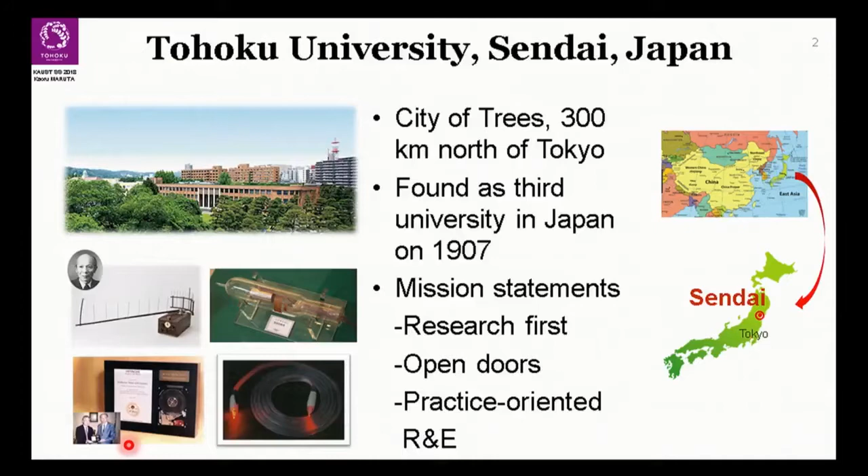And myself, I say that it has been 25 years since I started my career as a combustion researcher. In the 90s, mainly I was dedicated to combustion under microgravity. Actually, 3M: microgravity combustion, mild combustion, and microcombustion. So I'm always saying 3M - microgravity, mild, and microcombustion.

Let me make acknowledgements to my collaborators, particularly three people. Takashi Niioka, Professor Takashi Niioka, a former boss, he is already retired. He has been at UC San Diego, working together with Professor Williams, and of course he has a lot of theoretical papers, which I don't. And also I met Professor Yiguang Ju.

Now he's working in Princeton. Actually, he got his PhD in Tohoku. When he was a student in Tohoku, I was sort of a postdoc, called a Research Associate, and we worked together. It was a really exciting period, and still sometimes we meet and talk about miscellaneous things. And one more, a guy from Russia, Professor Sergey Minaev. Now he's in the Far East.

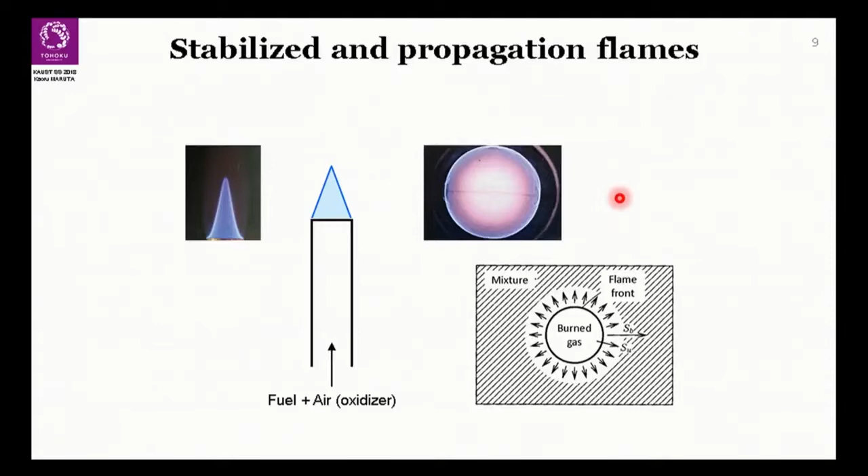This morning I talked with a young guy who's working on engines. Sometimes combustion theory doesn't work because maybe the engine is too complex, but it's still under the principle of basic combustion theory.

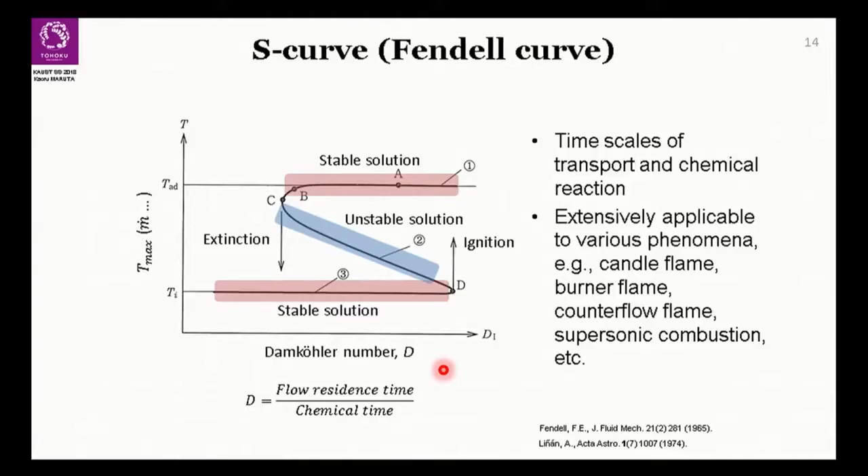You light it, and it's stable combustion. What's happening here? Of course some complicated phenomena are ongoing on the candle, but chemical reaction occurs in a certain finite time, not infinitely fast. But overall, the flow residence time allows the chemical reaction to stay there. So how do you extinguish the candle flame?

Yes, this makes the flow residence time shorter than the chemical time. That's why the flame blows out. This is a very, very simple concept, but it's applicable to burner flames, counterflow flames - I think even supersonic combustion overall.

So if your flame is unstable, you either increase the chemical reaction speed or increase the flow residence time. Then the phenomena moves to the right side of the figure, and this is the stable solution which corresponds to flame. If you decrease the reaction speed somehow, the Damkohler number becomes smaller and smaller, and finally the flame extinguishes to this point, which is like ambient temperature - reaction stops.

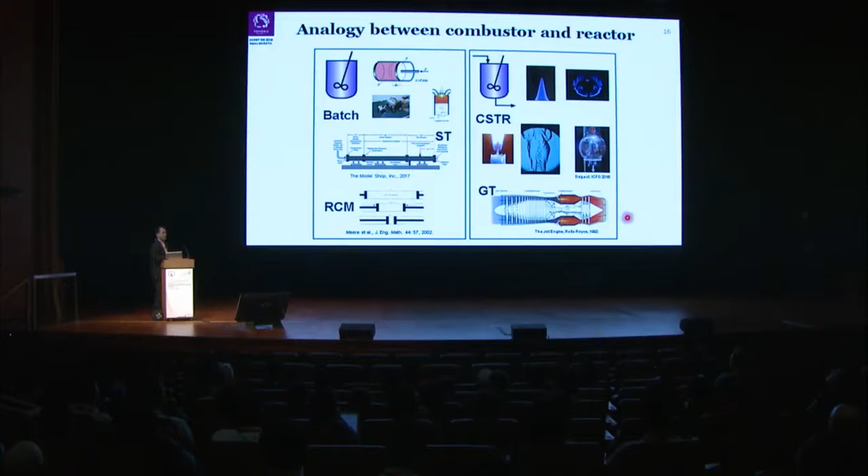Combustion problems are really widely multi-scale. Chemical time is like 10 to the minus 2 or even longer, for example NO formation. This morning Professor Dibble mentioned that the NO reaction is very long. So how to manage the NOx stuff—in the 1960s and 70s it was the biggest issue in the world, to avoid air pollution.

So what the combustion device does is use this difference in time scale. NO formation is very slow. In equilibrium conditions, NO forms in a certain amount, but since the reaction speed is very low, chemical time is very long. So after extracting the energy from combustion, which is usually very fast chemical reactions, you just stop the formation of NOx. That's the main strategy that modern combustion devices use.

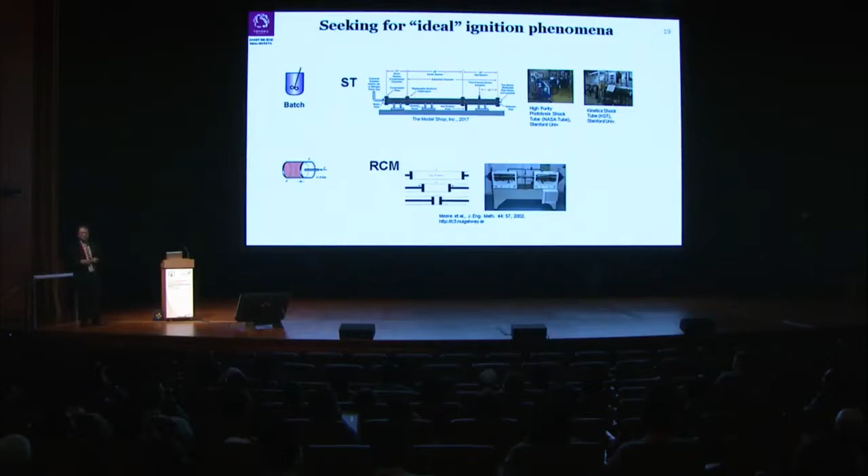Okay, again, please imagine that all the chemical kinetics are unknown. You need to have standard phenomena to construct reliable chemistry kinetics. So for that, mostly on ignition phenomena, I think the representative method is the shock tube.

I believe—have the students looked at the shock tube here already, or not yet? Already, yes, and some of you are working on that maybe. And also rapid compression machines—I think this is the same style as what you have here, right?

This is the style of the twin piston setup from Ireland, Galway, Professor Henry Curran's group. Very reliable data is obtained. So then, if you have standard experimental data combined with some theoretical work, you get reliable chemistry.

Also for ideal flames—what is an ideal flame? It's obviously probably one-dimensional, also adiabatic, also without any external effects, which means the area is infinitely large, a perfect plane, propagating in only one direction as a plane.

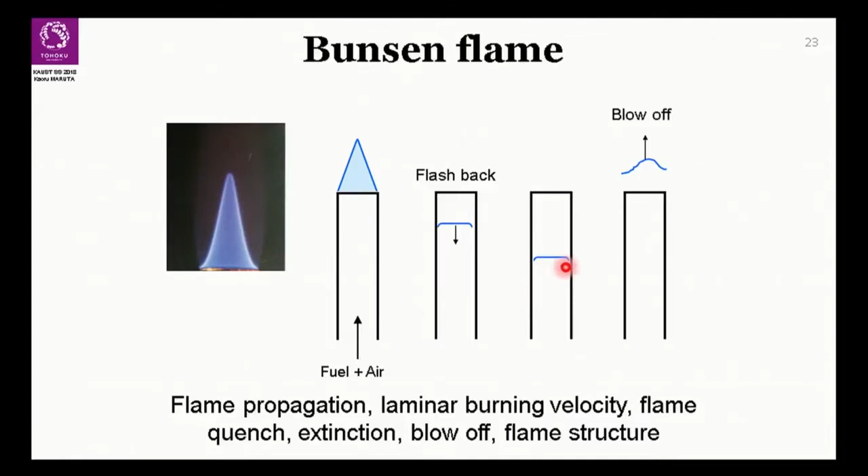And then this flame is stationary, but relative to the mixture, the flame is propagating into the mixture. On the contrary, if you increase the speed, this is blow off. So from the Bunsen flame, we have several very basic flame characteristics: laminar burning velocity, flame quench, extinction, blow off, and flame structure.

I believe most of you are already familiar with the chemical modeling stuff. For premixed flames, the mathematical treatment sometimes starts from the Rankine-Hugoniot relations, because there are two modes: one faster than the sound speed, and one much smaller than the sound speed—one detonation and the other deflagration.

So the flame is actually deflagration, and several levels of mathematical treatment are possible. Actually, I borrowed these figures from combustion physics. In the simplest model, the flame is treated as just a discontinuous interface between unburned and burned gas, and both sides are in thermodynamic equilibrium. This concept is very often used when the structure of the flame is not important.

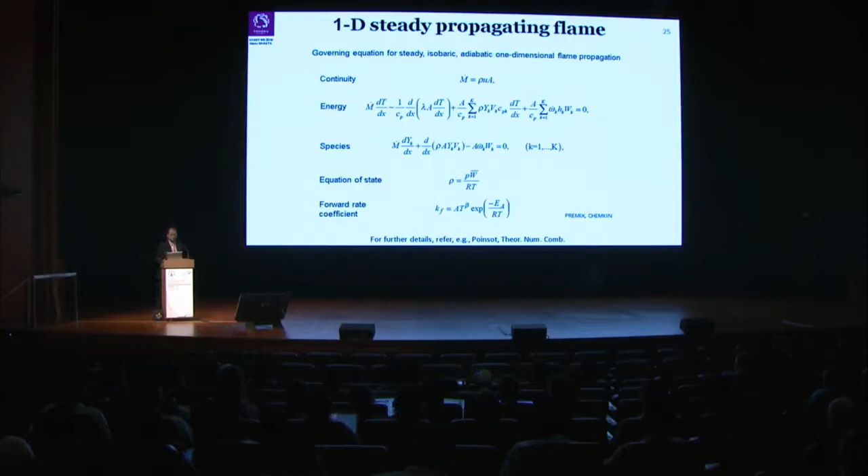Starting from methane: in the first, simplest model, reactants just turn into products, so you only consider methane and CO2. But if you need to consider the intermediates and the process of the reaction, you need to include more species.

Zeldovich presented just a two-step model. Before the computational period, the overall one-step reaction program was used, and is still used. But once you need to consider the behavior of intermediates—radicals or heavier molecules—then you need to have another intermediate species. This also predicts something very useful.

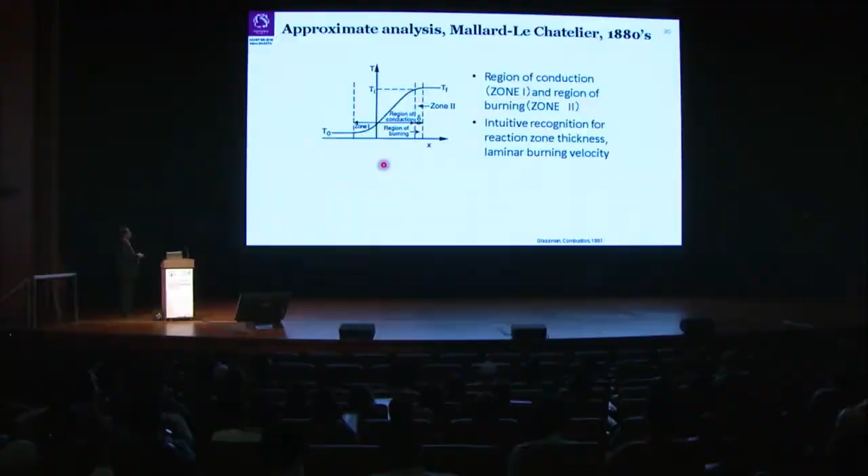You equate the flow going into the reaction zone with the reaction rate, and then you get the laminar burning velocity dependence. From this, you can readily obtain the relation between flame thickness, laminar burning velocity, and thermal conductivity. This gives an easier, more intuitive understanding.

For example, with a methane flame in air, if you replace nitrogen with another inert gas, the flame speed changes drastically. If you replace nitrogen with argon, the flame speed increases; with helium, even more. How do you explain this? If you have Chemkin, of course you can compute it and get the right answer, but why?

So here, for example, the argon flame is faster in laminar burning velocity. Why? Because argon is a monatomic gas, so its specific heat is lower than nitrogen's. Heat release is the same because fuel amount is the same, so the flame temperature of the argon flame is higher. If you compare argon and helium, both are monatomic gases, so flame temperature should be almost equal—but the thermal diffusivity of helium is much larger, so the laminar burning velocity of the helium case is much larger. It's slightly easier to capture the physics this way.

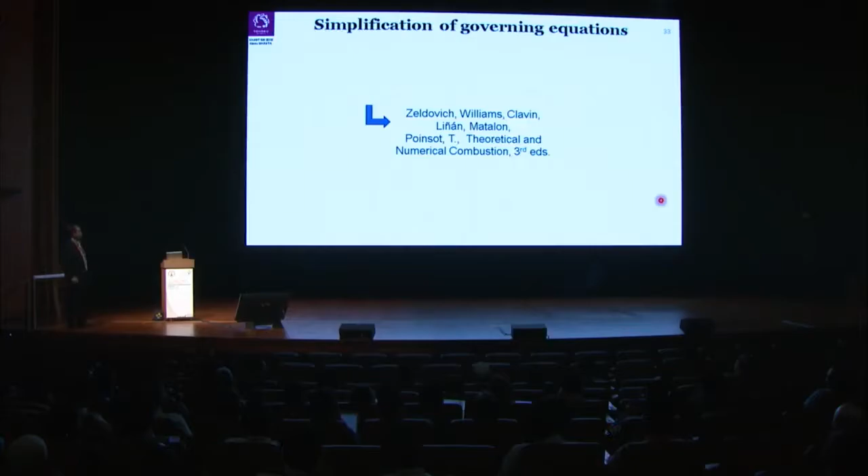Starting from the governing equations in Chemkin, further simplifications were done, leading to a very, very simple model. Such work was done by Zeldovich, Williams, and Clavin before the computational period—particularly Zeldovich's case, around 1940. For anyone interested in this derivation process, I strongly recommend reading the book by Dr. Thierry Poinsot.

The whole process is described step by step in that book. Actually, I learned that his summer school lecture in Princeton is very, very good, and I borrowed four slides from his lecture. It's a bit different, but this is like a set of equations, the same as in Chemkin and similar tools—then you get the result if you have the code and the computer.

But a simplification is made by assuming you only have two reactants, fuel and oxidizer. If you assume fuel-lean conditions, then the majority of oxygen remains unaffected, so you can ignore the change in oxygen concentration. Then you only need to handle the fuel concentration—just one reaction for the deficient species among the reactants. This gives a very simple equation which can be solved by hand, as Dr. Poinsot said. This is the field of theoretical combustion.

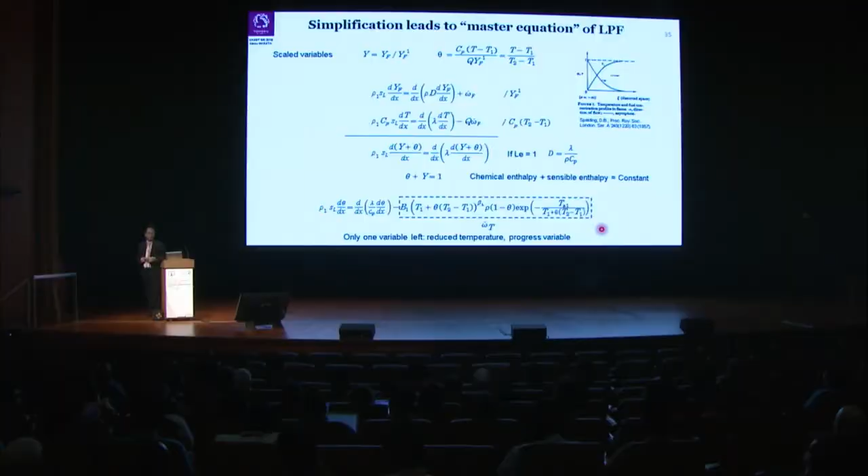Then the two equations can be combined into one if the Lewis number, mass diffusivity and thermal diffusivity, is equal. This theta, non-dimensional temperature, and non-dimensional fuel concentration sum to 1 everywhere, meaning the chemical enthalpy carried by the mixture is turned into thermal energy—chemical energy converted into temperature. Then you have very simple equations: convective term, conduction term, and reaction term, leaving only one variable, which can be regarded as the reaction progress variable. So only one parameter describes the flame property.

Okay, so ideal flame. By the way, what's the time? Oh, it's already one hour.

As I mentioned, ideal flame is hard to realize. Heat loss may always affect the flame, as well as flow non-uniformity and wall effects, either thermal or chemical or both. Because of that, you need to be very careful to prepare an ideal flame, or a flame with a certain known effect, and laminar burning velocity should be measured very carefully considering those external factors.

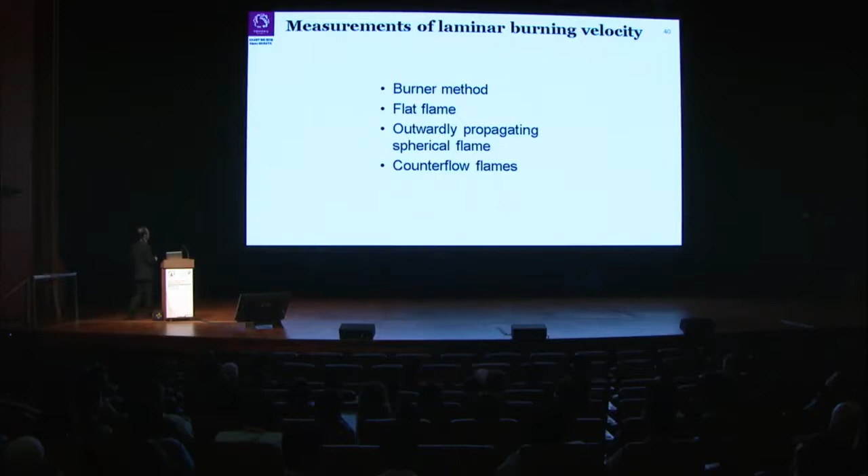Let me briefly go through the very basic methods of measuring laminar burning velocity: burner method, flat flame, propagating flame, and counterflow. This is the burner method—the laminar burning velocity can be measured from the inclined angle of the nozzle flame cone. It is possible, but for high fidelity modeling validation, I think it's difficult to use this method. Then there's the flat flame method, stabilized just above a flat flame burner.

But why is the flame stabilized there? If the flame were free from any heat loss, it could be anywhere, right? The reason it stabilizes just above the burner is because of some heat loss. This is a very modern flat flame burner developed by the Eindhoven group, Professor de Goey's group—a very clever design using a porous plate with temperature measurement by thermocouple.

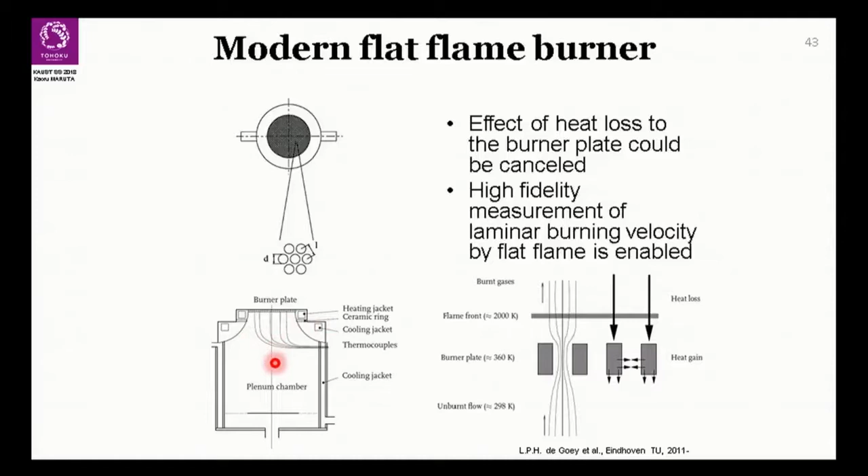If you magnify the porous plate region, the heat balance works like this: heat flows from the flame to the porous plate, heating it up, and this heat in turn heats the incoming mixture. If you measure the temperature time history of the porous media, you can find the point where all heat loss effects cancel out, allowing very precise measurement of laminar burning velocity—a very special technique.

And how about counterflow? Counterflow flame is very commonly used, and a variety of studies have been done with it. This is again one-dimensional. Although the flow is diverging, there's no conductive heat loss because the flame does not touch the burner wall, and the flow can be characterized by a unique parameter, the stretch rate—flame stretch is very important.

So how do you measure the laminar burning velocity with this? This is the actual velocity distribution, magnified, and here is the stagnation plane. Because of thermal expansion, the velocity profile has a minimum, and this point tells you the laminar burning velocity just before the flame.

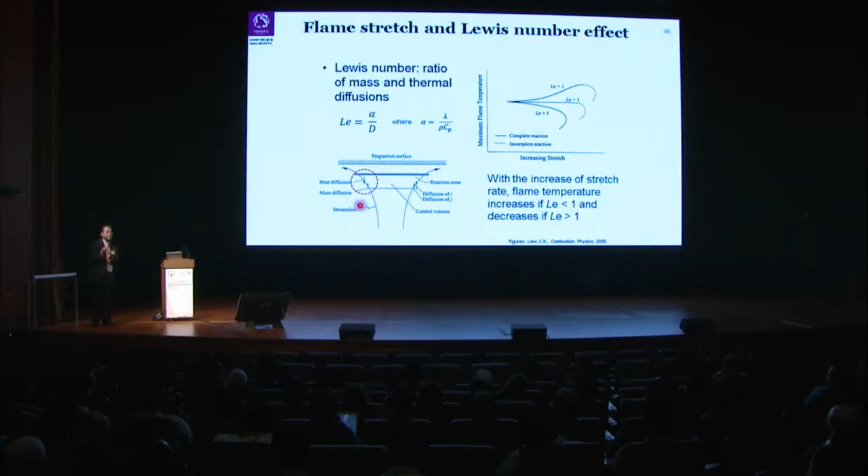Sometimes the flame is intensified, and sometimes the flame is weakened. This affects the behavior significantly, causing very different outcomes, and then from that minimum point, this is under a certain rate of flame stretch.

If you plot this velocity as a function of the stretch rate, you can extrapolate the data, and then you will get the laminar burning velocity, which is free from any stretch effect.

Again, the outwardly propagating spherical flame—this is one of the ideal flames. You take a mixture in a container, ignite it at the center, and then observe the propagation.

At the very initial stage, the laminar burning velocity was measured from the pressure history, together with experimental data and some simple analysis. But this creates very big uncertainties.

Some other factors are also included, again flame stretch, because ideally this assumption seems to work well, but sometimes flame stretch, ignition energy, and other factors affect it significantly. So it's interesting to see the history of measuring laminar burning velocity using this flame.

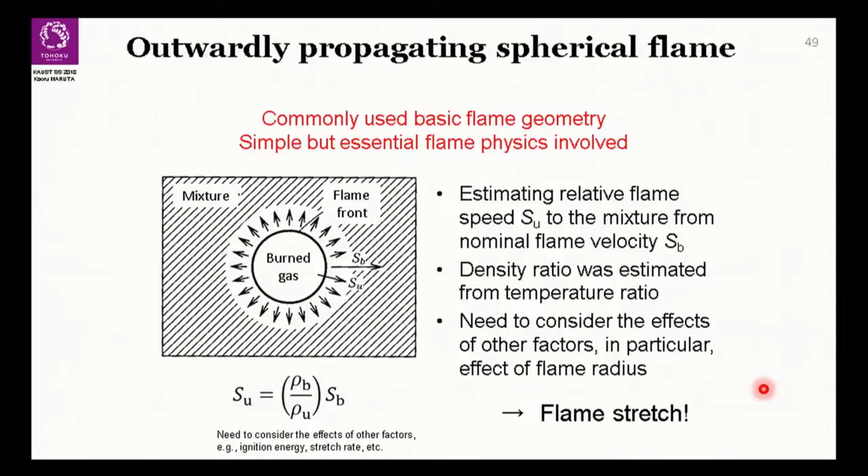Since the concept of flame stretch, studies progressed—I think it's the late 70s to 80s—before the concept of flame stretch, this effect was always hidden in the scattered laminar burning velocity data. That's the reason many results suffered from the flame stretch effect.

Since flame stretch is important, let's confirm the definition. The definition is the change of the flame area, per unit flame area, divided by unit time, and some equation derivation leads to this equation. This equation represents the effect of flow non-uniformity and flame curvature.

You can divide it into this one. This process is also described very nicely in this paper by Professor Chung and Law, and Professor Chung, as you know, is the founding director of the CCRC.

Let's confirm that in stagnation flow, the stretch rate is equal to the velocity gradient here. And for a spherically expanding flame, this term here should be plus. From the change of the radius and the radius itself, you can describe the flame stretch rate.

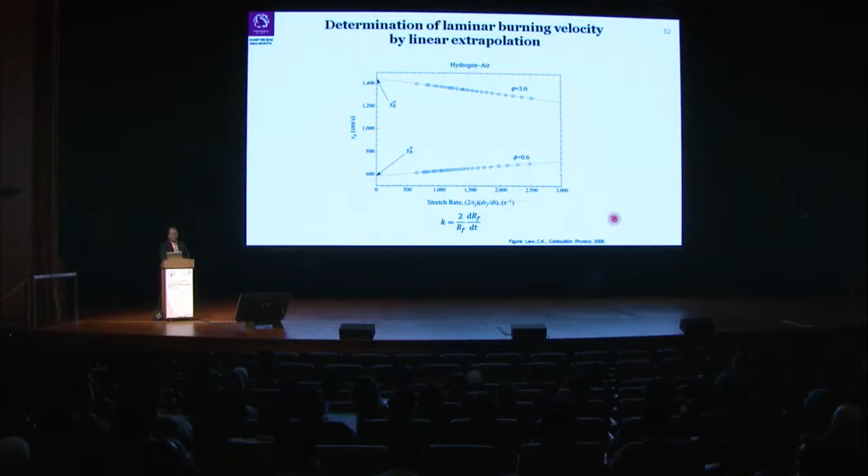This is really basic, but if you consider the Lewis number, it is interesting to see some of the interesting behaviors.

This analysis, I think, is from 2011, but the first papers were in 2007. Some French researchers started analyzing this process, going from ignition to propagation.

Where is the boundary between the ignition phenomena and flame propagation phenomena? It's not so simple, because for example, when building kinetics, you are talking about ignition in a 0D system, which is spatially uniform.

This condition is somehow realized by shock tubes and also by rapid compression machines. But usually ignition starts from one ignition source, starting from a point, and then propagating. After some time, the reaction front can be regarded as a flame.

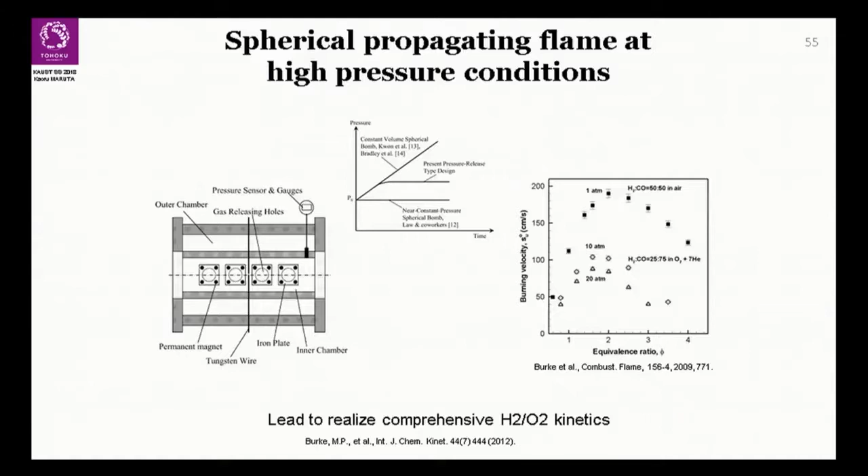After this recognition, very nice data was obtained by the Princeton group - Professor, now he's Professor Mike Burke I think, yes. It's really well-cited data with a long history, but if there's large uncertainty, then maybe there's some hidden physics you can find.

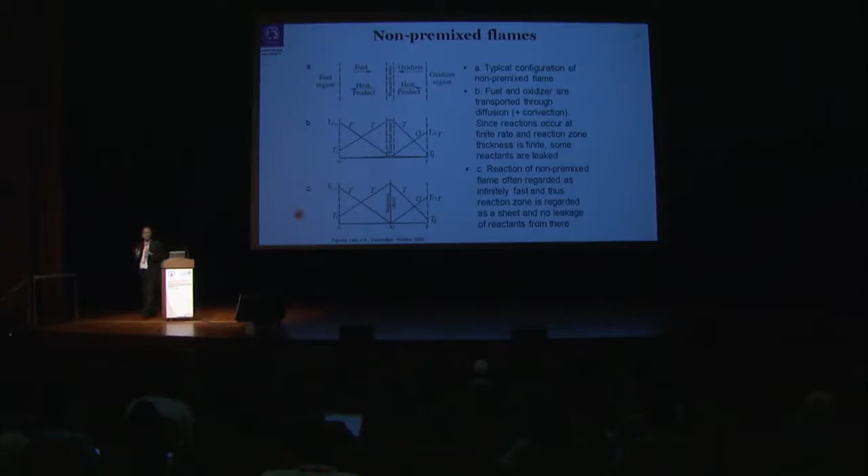It's the counterflow non-premixed flame. This is the very conventional setup - oxidizer from the top and fuel from the bottom. Here it's similar to the conventional counterflow flame, but the flame is formed just in front of the porous cylinder in the stagnation region. The same research is possible here.

This effort was done by the Japanese professor, Professor Tsuji, so this burner is called the Tsuji burner. This is very original, and I think no one has criticized that the data taken with this burner contributed significantly to the establishment of very high fidelity modern flame modeling, like chemical kinetics and so on.

Using the Tsuji burner - I think this work was done in the late 60s to early 70s - they probed temperature, and also used a very thin quartz sampler to measure species concentration profiles. Here's the temperature profile. This is the surface of the Tsuji burner, the cylindrical surface zone, and here's the luminous flame zone - temperature is highest here and then decreasing.

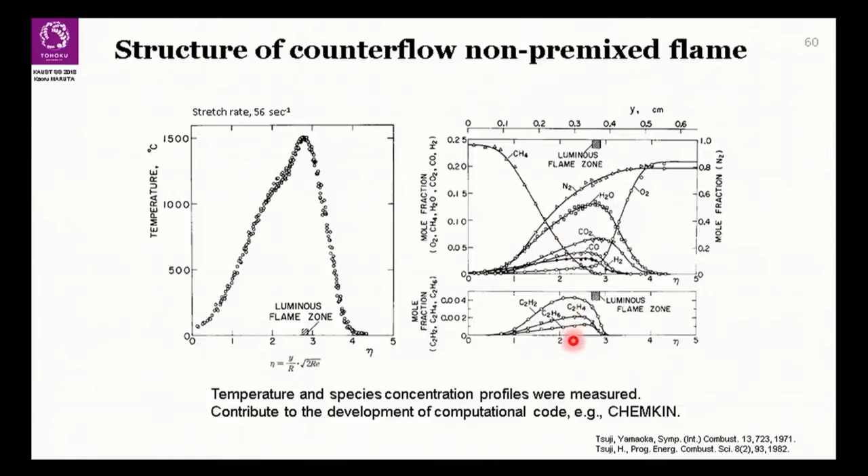Fuel is consumed, some intermediates form, and oxygen diffuses from the bottom and reacts, with some leakage observed, plus products and intermediates here. It's famous among Japanese students that there are no lines in the original data - they made lines connecting the data points themselves. So it's a very reliable experiment.

And for the young researchers, the Combustion Institute announced the Hiroshi Tsuji Early Career Researcher Award. This is sort of the gold medal for young researchers. This award is named after the contribution of Professor Tsuji and the Tsuji burner. So please try to get it.

Bill has a question. How old do you have to be? I think it's younger than 60. No, I'm joking. Actually, it's within 10 years since the PhD degree. So those who are less than 10 years from your PhD, try to get it. I think now there's only one winner, and this year the second winner would be announced.

Okay, regarding droplet combustion. Droplet combustion is the fundamental study of spray combustion. Of course spray is spray, but the simplest component is the single droplet.

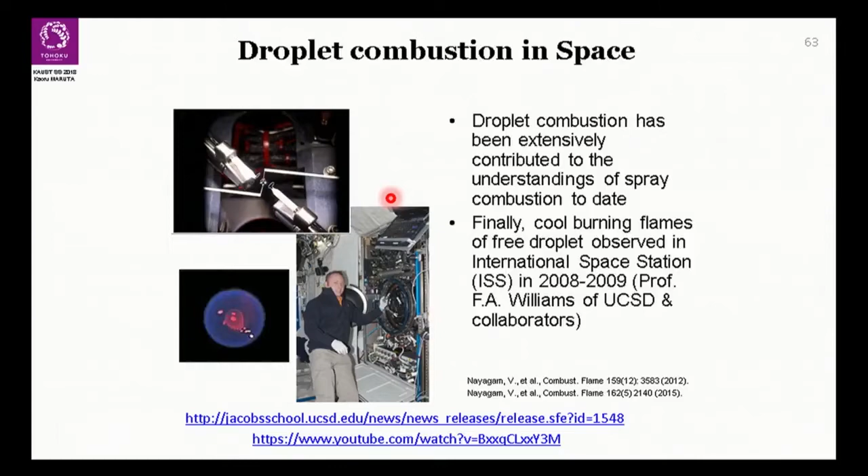This droplet combustion experiment was done on the International Space Station, led by Professor Forman Williams from UC San Diego. Using this setup, a free droplet is formed in microgravity under very ideal conditions - no buoyant flow, no objects along the droplet - and such very nice images were obtained. I will distribute the PDF files of this, and I recommend you take a look at the YouTube material, because there are very nice images and a very nice presentation of the results there.

Okay, let's go for the flame characteristics. This includes flame quench, flammability limit and quenching diameter, excess enthalpy combustion, and flame instability. Let me very quickly go through this.

This is the basic theory of flame quench, which was initially presented by Dr. Zeldovich in 1940, and then Dr. Spalding, and Clavin, and Williams, and so on.

Okay, let's look at this image. This is the temperature distribution of a very ideal adiabatic one-dimensional planar flame without any external effect, so temperature is uniform here in the burned gas side. We call this adiabatic flame. But once a certain kind of heat loss exists, whether uniform or local, heat escapes from here. Since heat generation occurs in the reaction zone, the temperature distribution typically becomes like this, with some gradient.

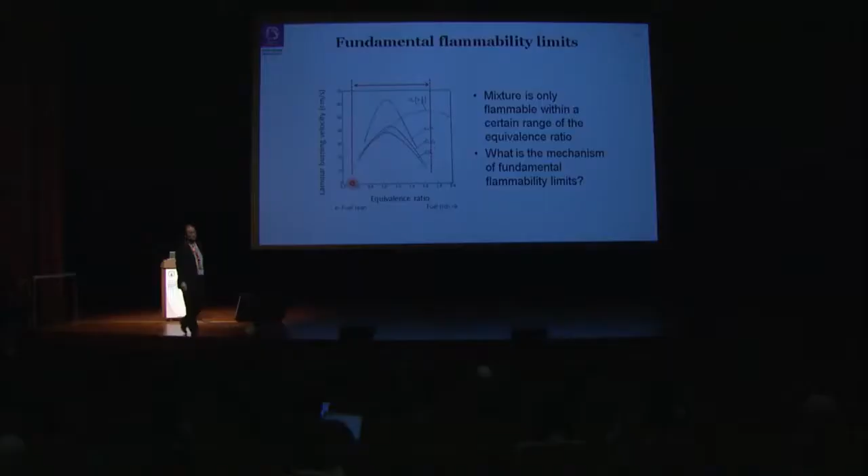It's too much fuel and too much oxidizer on both sides. Yes, of course, you're right. But if you extend it, you get a value known as the flammability limit. Some combustion handbooks state that for a methane-air mixture, this is the limit concentration, something like that. But many complicated phenomena occur in that region, which is why the curves stop there.

This right figure was presented in the 1950s, based on the analysis of thermal quench. This is actually a publication by Dr. Spalding, and this is the curve you see in your textbook. He divided it into several cases. If the heat loss is not effective, close to the limit, then the curve should be like that, which means the flammability limit should be 0% fuel, because if you have a small amount of fuel, it should react. Is it correct? Which one is correct?

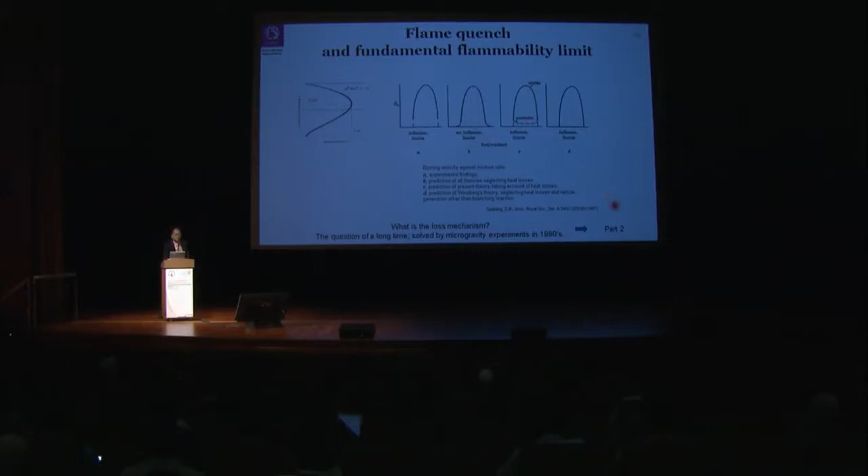So which is correct? This will be discussed in part 2 on flammability limit. And then, quenching diameter.

I think most of you know that if you put a flame in a very thin channel, like a quartz channel, the flame would die because of heat loss, too much heat loss. That's easy. But it's the same discussion, right, based on thermal theory. The heat loss is just replaced by conduction heat loss to the channel instead of to the unburned mixture. So the same discussion is possible.

Excess enthalpy combustion. Actually this is a fantastic idea, from Weinberg.

This paper appeared in Nature in the early 1970s. This is a sort of conceptual figure. This is the adiabatic flame temperature. But what happens if that thermal energy that the burned gas has is transferred to the unburned mixture? What happens? That's the question.

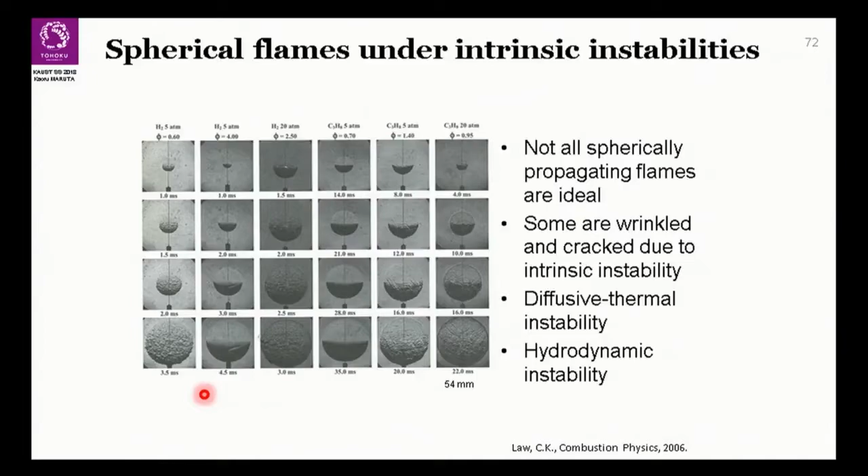If you look carefully, the two left columns are for a hydrogen-air mixture, an expanding flame. At the same pressure, if it is lean, the surface is all corrugated, under big instability. But in the rich case, the flame is smooth, sort of ideal. Under the same pressure, for propane it's vice versa: in the lean case, the flame is smooth, and in the rich case, the flame is under instability.

This can be interpreted through the diffusive-thermal mode instability. In the theory, there are diagrams predicting the boundary of stability and the different stability modes. It is well written, in the textbook and in papers. But furthermore, there is also some data here.

In the fuel-rich case, hydrogen used to be stable at 5 atm, but if you go to 20 atm, the flame again comes under very strong instability. Same happens in propane. If you go to 20 atm, it used to be stable in lean condition, but it's not anymore.

So flames are under several instability mechanisms, mainly body force instability, diffusive thermal instability, and hydrodynamic instability. These two are interpreted as diffusive thermal instability, but at higher pressure, hydrodynamic instability would be the mechanism of the occurrence of instability. Those are very famous figures.

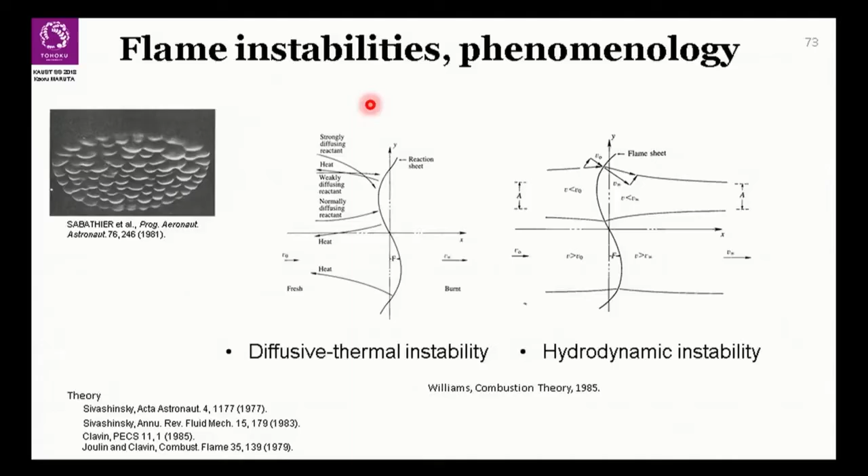This is the explanation of diffusive thermal instability. Across the flow tube, because of different diffusivity, the light species diffuse across the flow tube, coming in and out, and vice versa. Then mass diffusion can compensate or cannot compensate. Such preferential diffusion causes the diffusive thermal instability.

And hydrodynamic instability is due to expansion. So once the plane flame is perturbed, this instability is just encouraged. So the flame is unconditionally unstable in terms of hydrodynamic instability, and so many theoretical works have been conducted.

And this is also important, but in a practical case, I have a question to the expert audience. In engine combustion, is there any discussion on hydrodynamic instability? Who here works on engine combustion?

I would say, and I'm going to actually cover this subject tomorrow a little bit more, but I would say these effects are kind of wiped out, overwhelmed by the turbulence effects. And that's a general consensus about modeling turbulent combustion, which is why a lot of times people often neglect the preferential diffusion effects in the model.

How about the onset of knocking? Onset of knocking has to do with flame stabilization. Or maybe, onset of knocking has to do with the auto-ignition phenomena in some cases, of course, but regarding some of the mechanism from DDT...

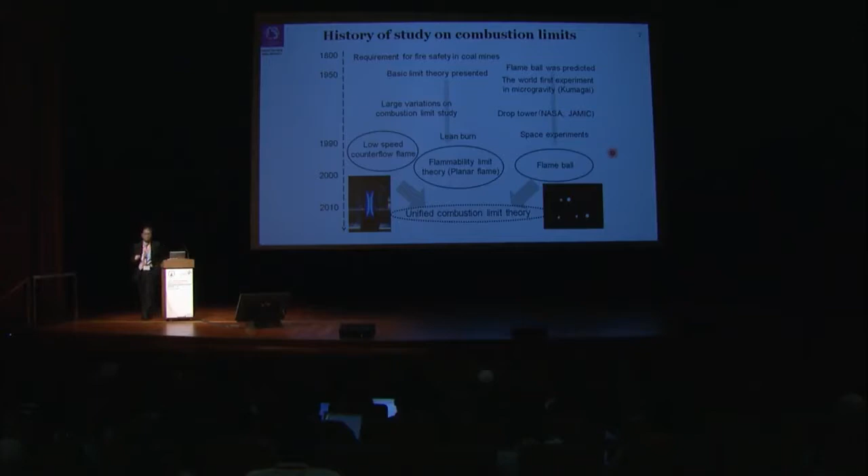Then a tremendous amount of experiments have been done, and I think up to year 2000, the limit mechanism of the planar flame was almost clarified. I think it's with the contribution of microgravity experiments. On the other hand, some peculiar phenomena called flame ball were predicted, observed, and confirmed. I will tell you later.

And now we are going to unify those two into a comprehensive understanding. Again, this is the simple theory.

Flammability limit may be induced by a certain heat loss. If loss is effective close to the limit, then the flame can quench. So is it due to conduction loss, radiation loss, adiabatic? Guess what — what is the limit-defining mechanism?

Some papers argue that because radiation is proportional to T to the power of 4, it should be effective at higher flame temperatures. But examination of, for example, flames close to stoichiometry shows that radiation is not significant. How about close to the limit? That's the question.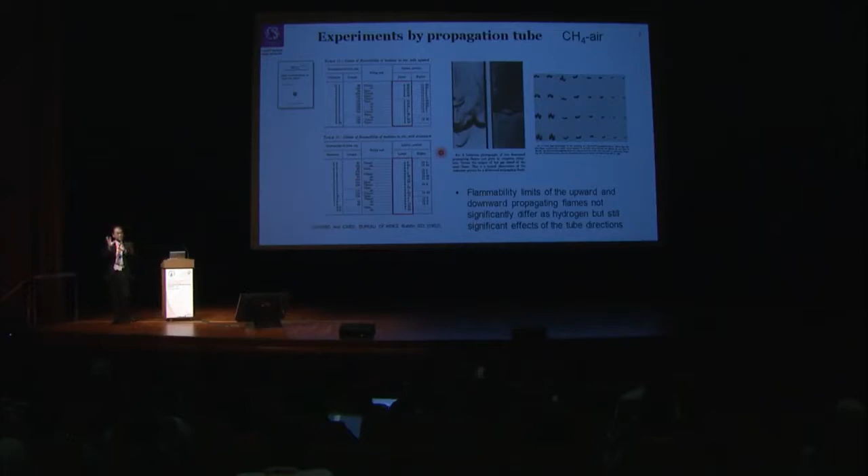For the case of methane, it's not as bad as hydrogen, but still insufficient. Upward case, it's some 5%. Downward case, 5 to 6%. But if you look at the flame, it's totally deformed, so it's not an ideal flame.

So what's the relation between the configuration of the flame and the limit? That's the big question.

In the combustion chamber, the so-called SEF, self-extinguishing flame, has been observed. If you ignite the mixture, flames start to propagate outwardly, but at some radius the flame just disappears. This is called SEF, and this experiment cannot be done under gravity because gravity just breaks away all the flames.

But if you make the experiment under microgravity, the SEF is observed here. So at that time, it was inferred that some of the thermal balance and also the effect of curvature that we discussed in flame stretch have combined effect. Here is the history of the flame radius with time.

Here, SEF is observed. The flame propagates but disappears at some condition. But in different conditions, the flame is just completely consumed.

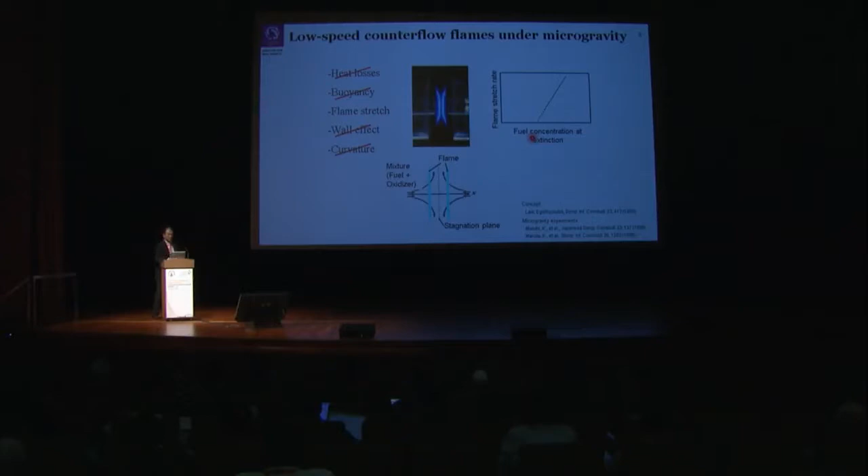Such experiments were conducted in the microgravity environment provided by the 10-second drop tower experiment. Unfortunately, the facility was closed about 15 years ago, but during the 490-meter free fall, we could have 10 seconds of microgravity conditions. Users can occupy a 1-meter cube in the 2-meter diameter capsule and make experiments for 10 seconds. I'm going to show you the image of the counterflow flame.

The nozzle diameter is 3 centimeters. During this experiment, flow rate is kept constant, and fuel concentration is decreased gradually. Since the laminar burning velocity decreases, the flame keeps shrinking, and at the moment of extinction, the flame just disappears.

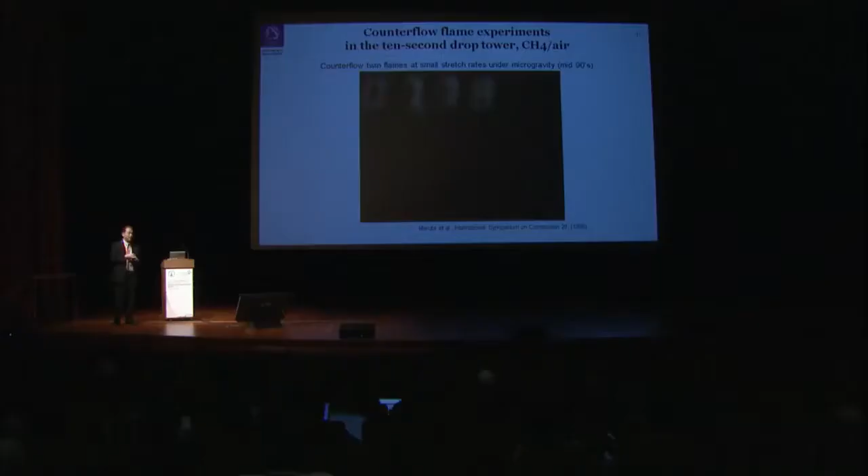The whole flame disappears. If you consider the delay with the mixture, you can identify the extinction concentration, and then you hold the data.

After this experiment, we got this curve. So the equivalence ratio at extinction is here, and the flame stretch rate is here.

For the propane mixture, it's a very straightforward curve, which would extrapolate to the limit, because in the textbook those values are indicated. But for the methane case, the sub-limit mixture is flammable, and it went back to this value. So what happened?

Actually, this is the computational work which tries to reproduce the methane case on the same plane. Of course it has a different appearance, but it's equivalence ratio versus stretch rate, equivalent to the flame stretch rate. So this is like a C-shaped curve.

For short, this is the temperature curve around here. This means if you have a third axis here, a temperature axis, and plot it as a function of stretch rate, then this is the curve. So you have the extinction here, and also here, at this side.

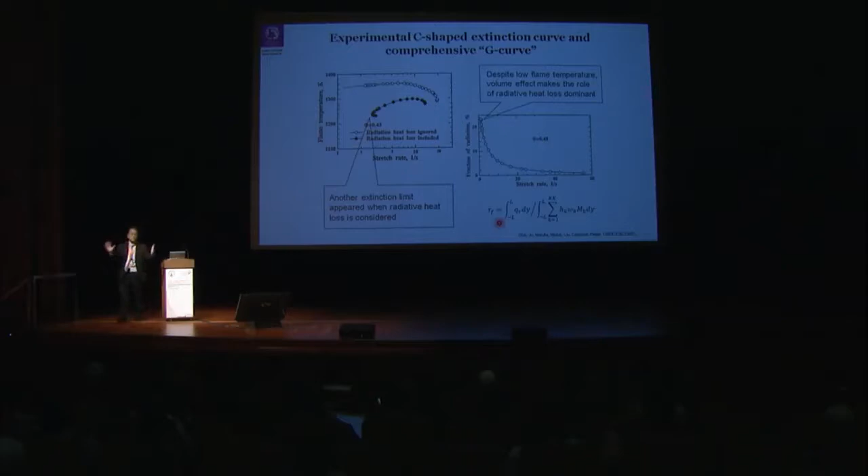And if you look at the radiation fraction, meaning the total radiative loss across the domain divided by the total heat generation, with the decrease of stretch rate, less and less chemical enthalpy is coming into the system, but the effect of radiation increases, becoming very large close to extinction.

In addition to this point, on the lower side of the stretch rate, another extinction limit appeared. This is the so-called radiation extinction, and this forms an island shape.

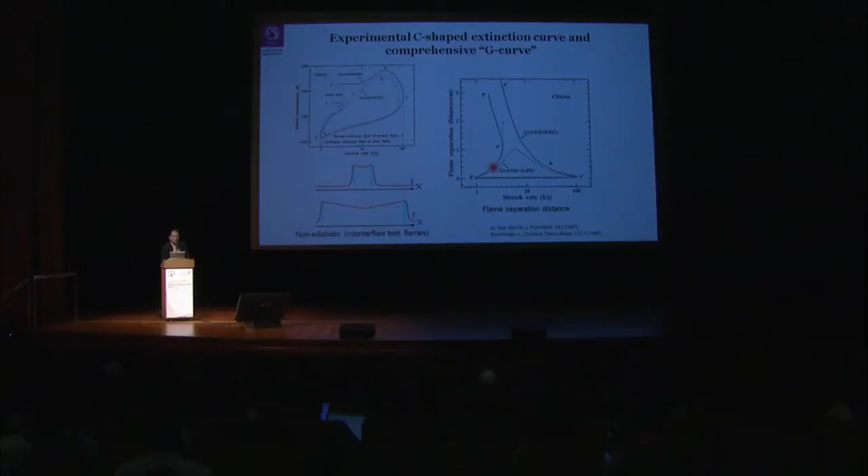This island shape consists of a C-shaped curve, but further increase of the equivalence ratio leads to bifurcation. If you plot the flame standing-off distance, there are two flames: one far apart, another standing very nearby. So one is here standing nearby, and then far from here in the counterflow flame configuration.

What is this? This is actually a single flame. At a very low stretch rate, the effective stretch rate is very, very small, which asymptotes to the one-dimensional plane flame, but under the radiation effect.

If the conceptual temperature distribution is drawn here, when the two flames are close, there's only a small dip. If there's no radiation, it's flat. But since there's radiation, it has some temperature dip. If the flame is far apart, then radiation acts here.

So this leg of the curve is equivalent to the 1D limit.

Then if you change the Lewis number, for methane-air mixture, Lewis number is like 0.97, almost equal to 1. In this case, the curve is C-shaped, and this leg is here. So the sub-limit mixture can be flammable up to this point, but the 1D limit is here. From this, we learn that we need to define the flame configuration when we discuss the flammability limit.

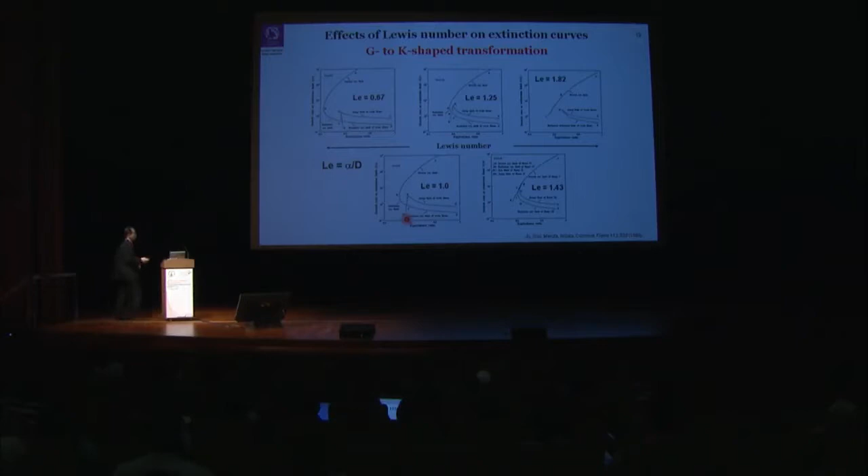So for safety, maybe we need to consider the widest flame geometry. With the change of the Lewis number, for example smaller Lewis number, meaning the hydrogen-air mixture, or heavier fuels with much larger Lewis number, the curve deforms like this. The relation between the turning point and the planar limit is taken over here, around here, and then here.

In addition to the straightforward simple curve, such a lower branch remains. So what we observed for propane-air flame is this shape, and for methane flame, this shape was observed. Eventually, the interpretation is like this: the methane-air curve flame is interpreted like this, and the propane curve is like this.

So sometimes the limit of the planar flame is not equal to the widest limit of the mixture. This is the understanding of the flammability limit of the premixed deflagration wave. Okay, let's go to the flame ball.

Does anyone know flame ball? Who is familiar with flame ball? Not so popular? Okay, let me tell you a bit.

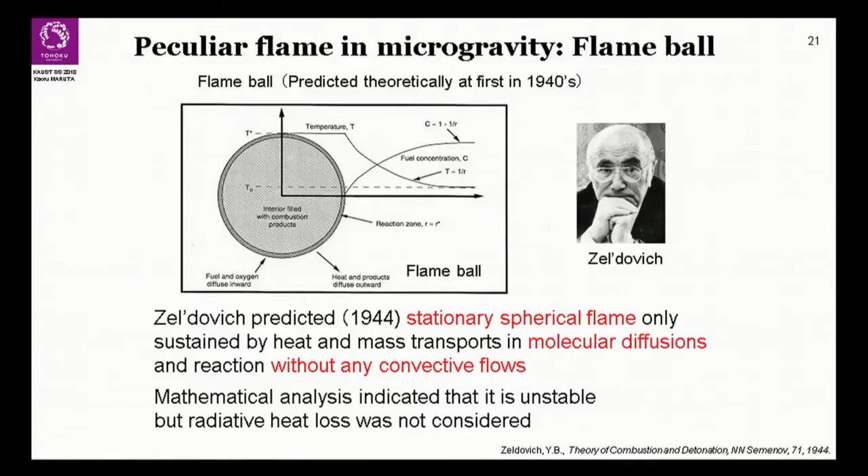Flame ball is a flame which does not propagate. If you ignite the premixture, usually from the ignition point an outwardly spherical flame expands. But the flame ball just keeps its radius constant and stays there, but only in microgravity. In the gravity field, of course, it's swept away by buoyancy.

This phenomenon was actually predicted theoretically by Zeldovich in the 1940s. He was just playing around with the equations and found that if you neglect one term and keep only the diffusion term and reaction term balanced, a spherical solution should appear. But after stability analysis, he found that this solution was unstable, so he concluded that this phenomenon is not realistic, just a mathematical imagination.

In the adiabatic case, the system is spherical geometry, and F is the heat loss term. For simplicity, since it's adiabatic, just set F equals 0. Then it's very easy to get a solution here, and this is the solution.

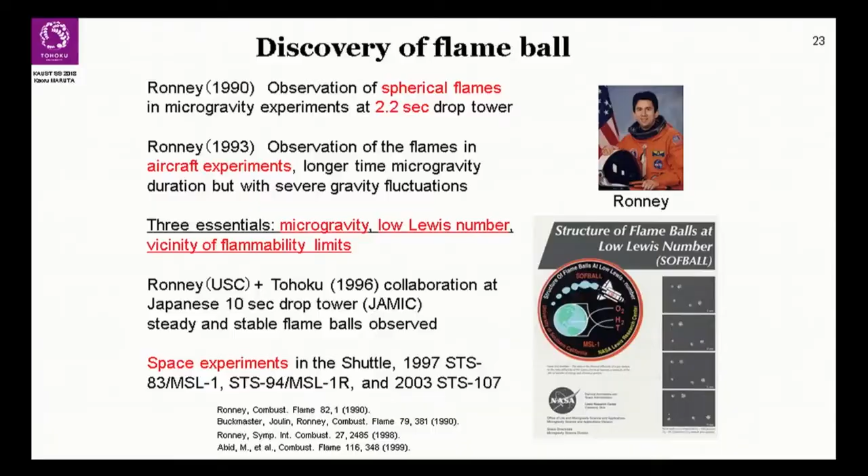Actually, the phenomena was observed, I think, 40 or 50 years later than the Zeldovich prediction. Professor Ronney from USC, when he was young, made an experiment at NASA Glenn in Ohio, at the 30-meter drop tower, with 2.2 seconds of microgravity. He found something very funny phenomena. Later on, some mathematical combustion experts analyzed those phenomena and guessed it might be a flame ball, which was predicted long ago. Ronney and us collaborated and made an experiment in a Japanese drop tower to try to reproduce the phenomena. After successful indication, Professor Ronney made an experiment in the space shuttle - I think his apparatus flew 3 times - and finally he proved the existence of stable flame balls.

Why? Because Zeldovich did not consider anything about radiation. But once the radiation term is introduced, like in Spalding theory, the curve, the simple curve becomes bent, and then there are 2 solutions. So another branch appears, which might be stable.

Why is the radiation term significant close to the limit? This is because of the diffusion effect. Because of diffusion, the reaction zone thickness is very large. Since temperature is very small, at least much lower than stoichiometric combustion, radiation intensity itself is weaker. But because of flame thickening, reaction zone thickening by the diffusion effect, the body effect is significant. Finally, the rate of radiation divided by the total heat generation becomes large very close to the limit. That's the mechanism by which radiation plays a dominant role very close to the limit.

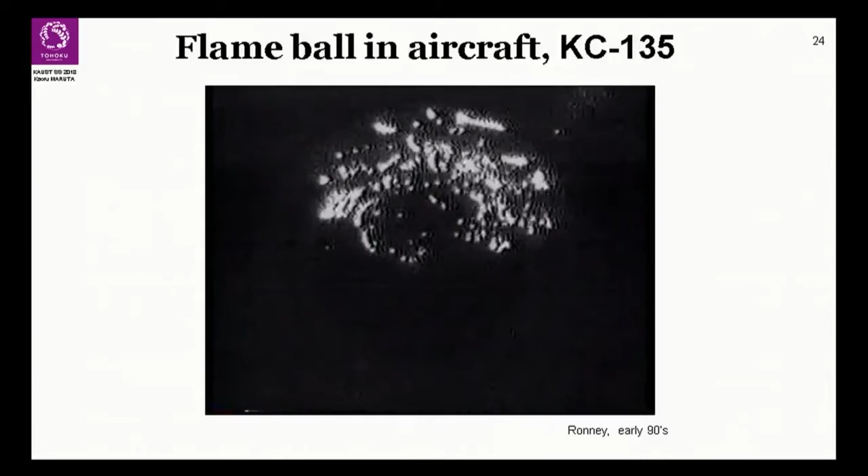I'm going to show some video images. I hope this works. This is the experiment in an airplane in the United States that Professor Ronney did - the existence of flame cylinders, evolving from and returning to flame balls or hot spherically shaped products. Unfortunately, because the quality of G is not stable in the airplane experiment, it's difficult to conclude whether the flame ball is stable or not.

So then we made an experiment in a drop tower in Japan. It's only 10 seconds. At the end of microgravity, it seems to be stable.

So the flame behaves exactly as the equation predicts for the case of the flame ball, also for the counterflow flame. Once you introduce the radiation term and compute, there's some complicated curve, but the flame just follows the prediction of the governing equations. After those experiences, I was so impressed - flame is always unstable and unpredictable, but once we prepare very well-defined conditions, flame behaves as predicted.

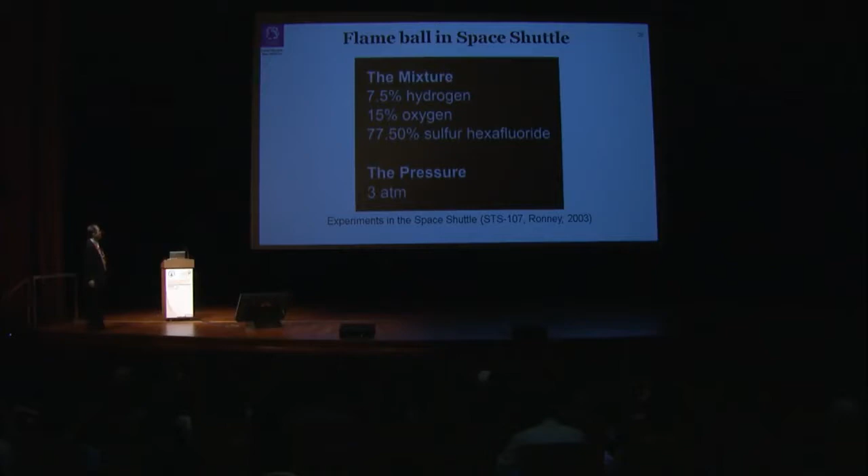Also, I borrowed some images from Professor Ronney's homepage - I think it's not available anymore. This is the experiment from the space shuttle. It's 15 years ago. For me it's recent, but for you guys it's long ago.

This is live video from inside the combustion module looking at the flame balls that Payload Commander Mike Anderson has ignited. We think we got a whole control room full of flame balls here, so we're going to call this the Orbit 2 flame ball crowd. We copy, Dave, we can get all those flame balls named in the mission summary we send up. The lead flame ball is named Kelly. Mission Specialist David Brown continuing the tradition to name some of the flame balls inside the combustion module, naming it after the Orbit Team 2.

They announced that during 5 minutes, the flame is completely stable. Of course it's not perfectly stable, because after maybe 1 or 2 hours, I think all the fuel in the container may be consumed totally. But maybe we should say quasi-steady. If the domain is infinite, then it should be stable. So finally, the stability of flame balls was proved by the space experiment.

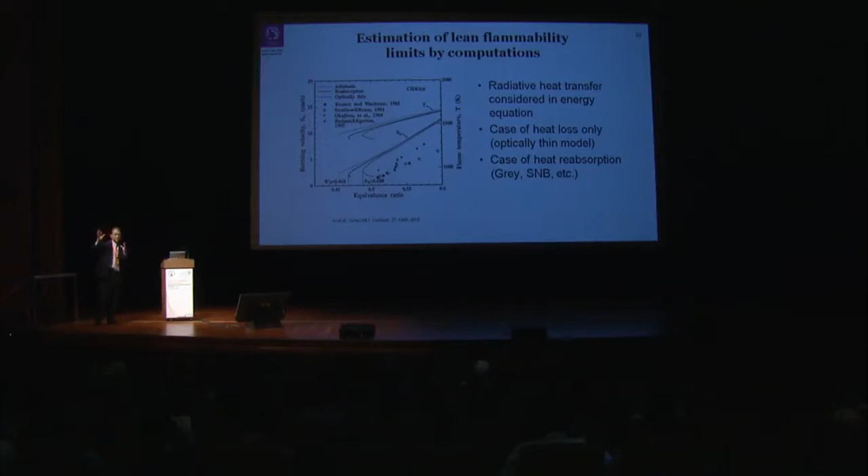So if you have a mixture which has radiatively participating media, for example CO2, CO, or maybe methane, before combustion, if you have such species in it, then radiation emitted from the burned gas is reabsorbed in the unburned gas. This might be the case in engine combustion highly diluted by exhaust gas.

So in ideal condition, probably the limit is somehow affected by such effect, but no work was done there. Also, by making a very large amount of EGR, the Lewis number of the mixture is different, so the different Lewis number effect and stretch effect is unknown. Under very lean conditions, anyway, the flame is sustained, seemingly beyond the limit. This can be explained by the different heat balance.

So no fundamental work was conducted there. The engine is choosing the very optimal point where the flame can survive. That's what we can guess from those results.

Okay, so far we have discussed the limit of plane flame and also the limit of flame ball. But how is the combined effect? Let me just quickly go through the project that we have been working on for already 8 years. Now we are making experiments in the airplane, and I think hopefully we would make experiments in space within the coming 2 or 3 years.

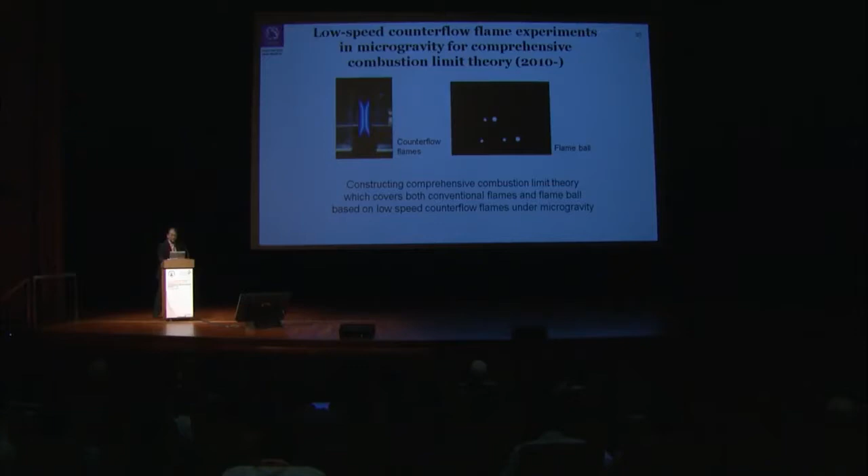So by using the counterflow flame, but particularly at very, very low speed, the condition is very close to the quiescent mixture, although some very weak stretch remains. So then maybe we can observe the flame ball in such geometry.

And then, thanks to well-characterized chemistry and modeling, preliminary computations were made for the counterflow geometry, of course with a radiation term, and also for the flame ball conditions, of course with a radiation term. The results showed that, okay, we used a very artificial mixture.

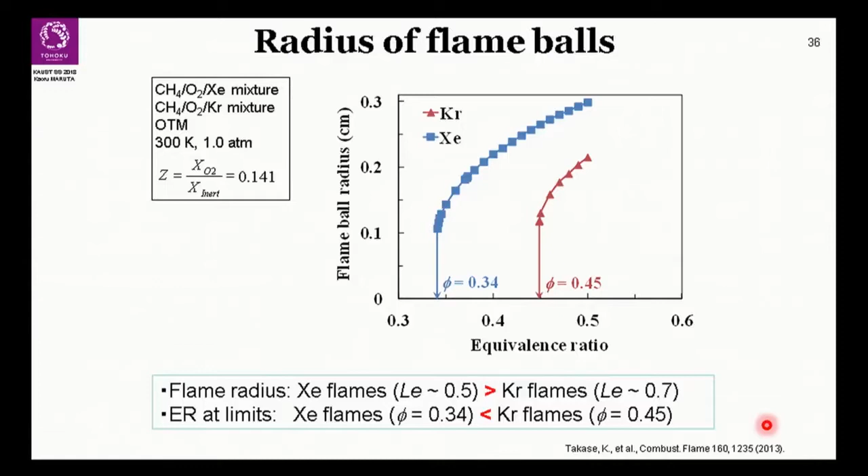By the way, that flame speed, laminar burning velocity, is an eigenvalue of the governing equation of the 1D flame. And flame radius is the eigenvalue of the governing equation of the flame ball, because it is the constant value. So the flame ball limit of the krypton mixture is here, and the xenon mixture is here.

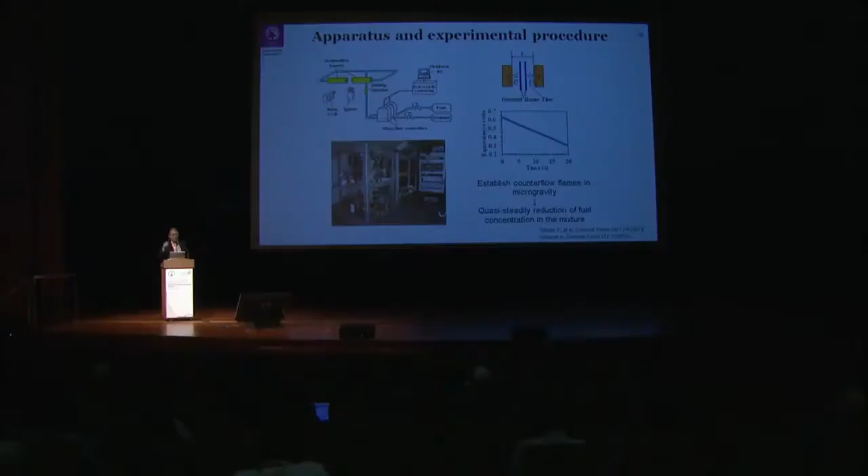And then we have a very small airplane in Japan for microgravity experiments. I think it's for 6 persons originally. We make experiments very simply, the same way: a computer-controlled counterflow burner, and by keeping the flow rate constant, the equivalence ratio is changed with time. This is an image of the experiment.

Okay, in the airplane, there's some acceleration before microgravity, and then it starts going up, and from here the parabolic flight starts. For about 20 seconds, the airplane experiences free motion, and during that period we can make the microgravity experiments.

Now it's 2G. I think our colleagues, once the microgravity starts, they float because of the spring of the seat, but with the seat belt, they stay there. Something happened—that's a very bad operation. Maybe data from that flight cannot be used.

Yes, 2G, 0G, 2G. Who wants to do that? I did once. I was okay, but not anymore.

We repeat the experiment within 1 hour, as much as you can. So usually we do like 14, 15 times. Not my job.

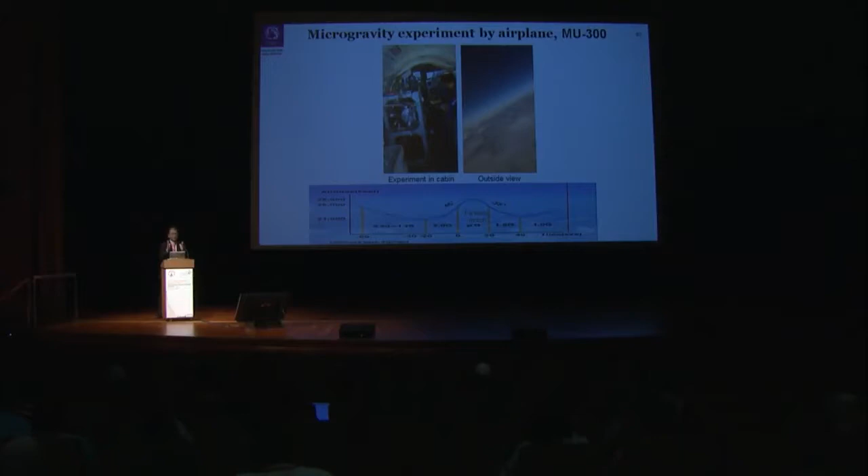Through this experiment, we did the counterflow flow experiment at very, very low stretch rate, and then look what happened. This is the Xenon case, the twin flames. With the decrease of the stretch rate, flame becomes one, and then instead of disappearance, flame is somehow trying to go back, not perfectly spherical, but both. It's not that flashy an image, but can you imagine how happy we are to see this image for the first time?

This is very evident. Even in the counterflow field, something like a flame ball can be formed. Those line images, the couple, it's just by accident it is coming into this. So this is not a fully successful experiment, but the image is good for the demonstration.

Okay. Our interpretation: this is of course the numerical consideration. Counterflow flame with decrease of the equivalence ratio, temperature becomes lower and lower, and then extinguishes here.

But at the same time, in the same mixture, the flame ball solution has increasing temperature with decreasing equivalence ratio, because the flame radius becomes smaller and smaller. And if you remember the governing equation of the flame ball, it is a strong function of the radius. So temperature increases to the extinction.

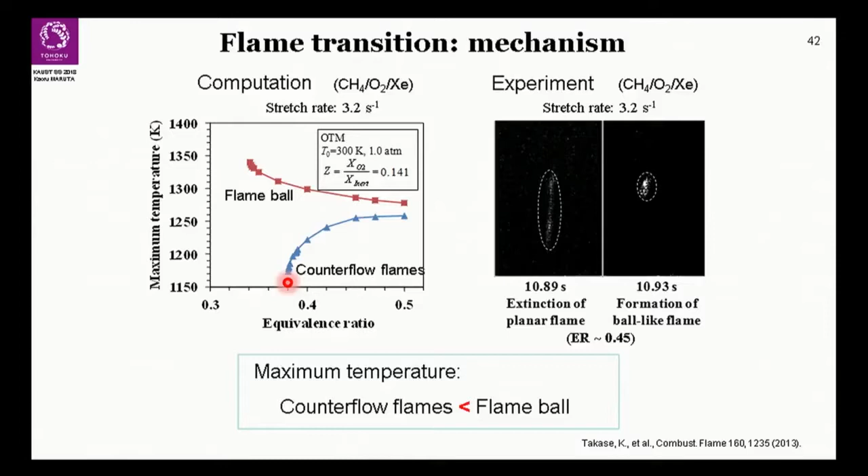So then what we suppose is with decrease of the counterflow, temperature becomes like here, but at this point, the flame solution disappears. So then the mixture is trying to find a solution where a flame can exist. Then a jump occurs to here, and then up to here. That's what we guess. I don't know the truth. Maybe we need to make further experiments.

Yes? Then a jump occurs - what do you mean? The temperature climbs out of nowhere? There you are at 1200 Kelvin, and then you jump up to 1300 Kelvin? Yes.

So the counterflow flame was acting like an ignition source for the flame ball. So the mixture is ready to have any solution. But since the solution for the deflagration wave disappeared, and there's thermal energy to ignite something, then the flame ball is there. That's our interpretation. Of course, we don't know for certain.

Any other interpretation? I have none. Thank you.

In addition to that, we found phenomena like that. I hope the video works correctly - it's an 8-year-old computer, not smooth. But do you remember the cellular flame image that I showed you at the flame instability discussion?

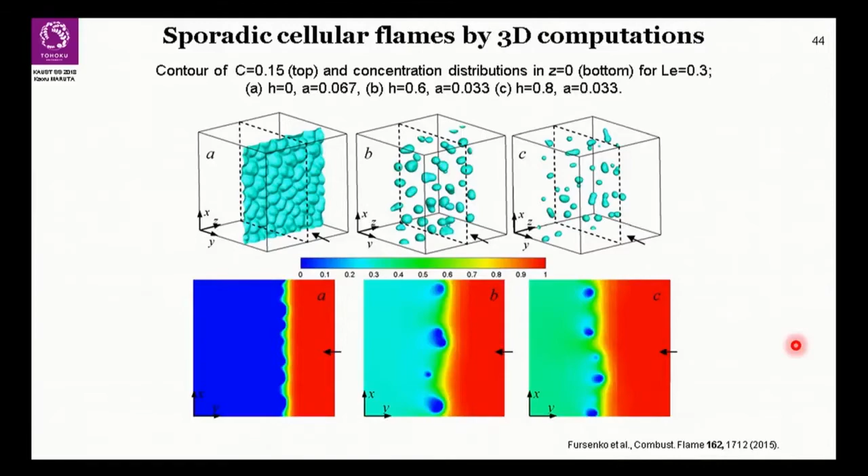And then we found something similar to experiments. So further down there, we have a flat flame, but at certain conditions, flames start to wrinkle because of the diffusive thermal instability. And furthermore, if you decrease and intensify the radiation loss or whatever, those cells are separated into something like balls.

This implies that we need to modify the whole picture of this image, mainly in those two areas. Here we have the scattered ball image, which we named the sporadic flame. And also here, the counterflow flame cannot be planar anymore.

The flame itself is trying to survive by itself.

So this is the regime diagram from the numerical experiment, compared with - of course it's not quite correct, it's not quantitative, but qualitatively, similar phenomena are observed.

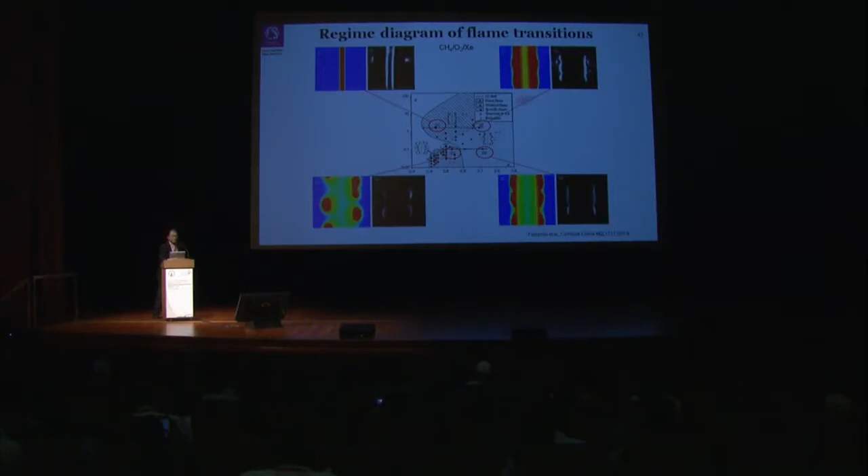So in addition to the Ju and also Law, what we call the G-curve, we have some extension by those ball-like flames, and also here we have a cellular flame. Experimentally, it is difficult to make a total survey in the airplane, but it is somehow close to the observed results.

Now, since the flame ball solution temperature distribution is proportional to the distance - inversely proportional to the radius, 1 divided by radius - the temperature is in between them. So probably what we observed is something in between two flame modes. That's our current interpretation.

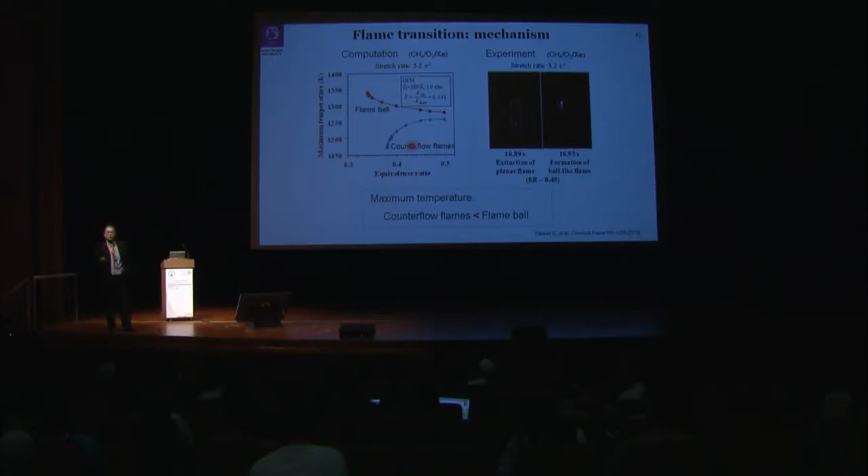The easiest example is a mixture with Lewis number less than 1. Adiabatic temperature is not affected by the stretch, so you have a certain value. But under certain flame stretch conditions, the temperature of the flame is much higher than the adiabatic flame temperature. This is a typical example. It's already observed in counterflow flame experiments. Make sense?

You ask? Yes, please ask me the question again. If you have a mixture which has Lewis number less than 1, then put this mixture under some certain appropriate stretch condition, flame stretch condition, the flame temperature is much higher than the adiabatic flame temperature. Such phenomena is often observed in counterflow flame experiments.

Also for the mixture, if you ignite it and get an outwardly propagating spherical flame kernel, before reaching its asymptotic value, the flame speed was higher, as I showed you. In that case, flame temperature is higher. Maybe kernel temperature, reaction zone temperature, is much higher than the adiabatic flame temperature because of the Lewis number effect. Okay, thank you, thank you.

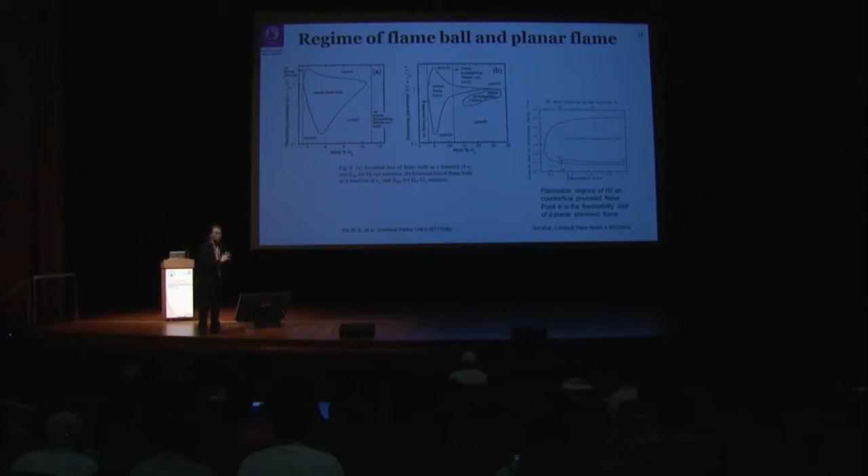And what is the effect of the Schmidt number on this combustion characteristics? Schmidt number, but no flow, right? Schmidt number, Lewis number—I think it's not the decisive mechanism. You had discussed about the effect of Lewis number, but please remember that for the condition where stable flame ball is observed, there is no flow. Everywhere, no convection, almost no convection. Ideal flame balls are just observed in still quiescent mixture.

But in the counterflow case, of course, there is very, very weak convection. Thanks. Let me start from this for part 3. This is flames under extreme conditions. Initially, flame quenching and excess enthalpy combustion are revisited, and then those two topics would be connected to mild combustion and microcombustion. Those are the two topics that we have been working on. The quenching diameter—it is, of course, written in some textbooks for a certain fuel: quenching diameter is blah blah blah, 2 centimeters, 3 millimeters, 2 millimeters. But essentially, it is the same as the flammability limit. The flame is under the concept of this one.

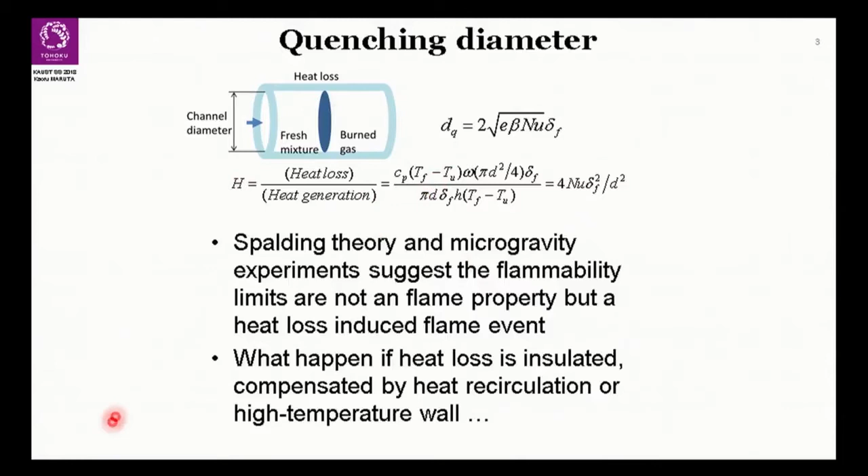I changed, let me go back. Yes, this concept, very simple.

For considering the efficiency of a combustion device, it's very useful to look at the exergy loss, the availability loss during combustion. One group in Japan, from chemical engineering, proposed a very nice idea to use exergy recirculation - they proposed a social system which does not include any combustion, starting from reformation.

What is exergy? Exergy can be chemical, thermal, whatever. By using exergy recirculation, it's like a heat pump - you increase the use of exergy and attain optimum conditions.

This is a numerical experiment of a one-input, one-output combustion system. As a function of inlet temperature, if you look at the loss of exergy of the outlet burned gas, it has a value of about 30%. This means that when chemical energy is converted into thermal energy, for most hydrocarbons, 30% of the exergy is lost.

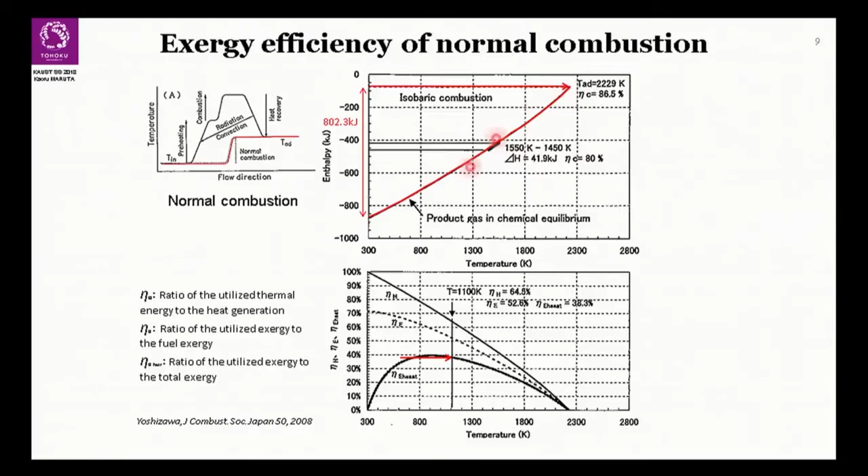So you start combustion here, for isobaric combustion at 1 atmosphere, and then you reach the adiabatic flame temperature here. Just assume, using this burned gas, we try to heat something, maybe in a furnace, up to 1100 K. Then you can effectively utilize the energy from here to here.

If you compute the three kinds of efficiencies: the first is the ratio of utilized thermal energy to heat generation. Second, ratio of utilized exergy to fuel exergy. And third, ratio of utilized exergy to total exergy.

And look at this curve, this one here—it's below 40%. So assume that if you heat something at 1100 K with combustion starting from room temperature using 1 mole of methane, then only 40% of the exergy was effectively used.

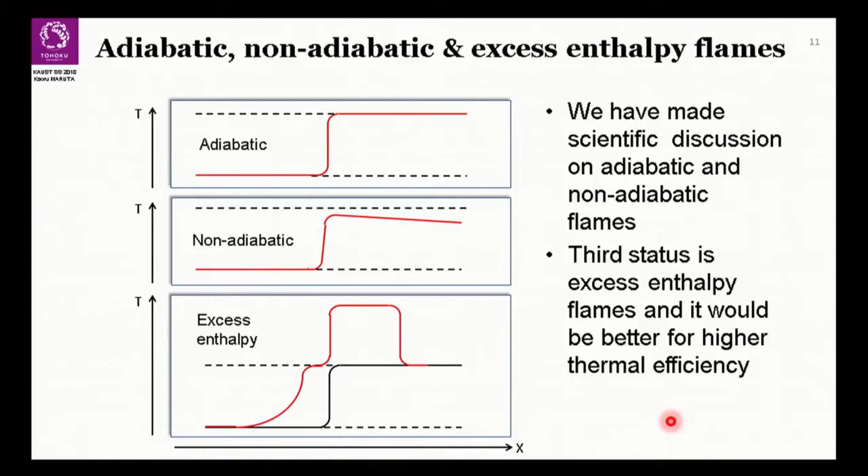The top figure shows the adiabatic flame, which we dealt with in part 1 today. The second one we dealt with is a flame with certain heat loss, which leads to discussion on flammability limit, quenching distance, and so on. And the third one—this distribution is somewhat strange—is heat exchange and then chemical reaction, which reaches a higher temperature than the adiabatic flame temperature.

This mode can be reached, of course, with porous media tubes, also some radiation emitter from burned gas to the radiation receiver in the upstream, or you can combine two flames or something like that. Is it not realistic? Do you know any example where such combustion is attained?

Where is Paul? Okay, let me go on. Here we have.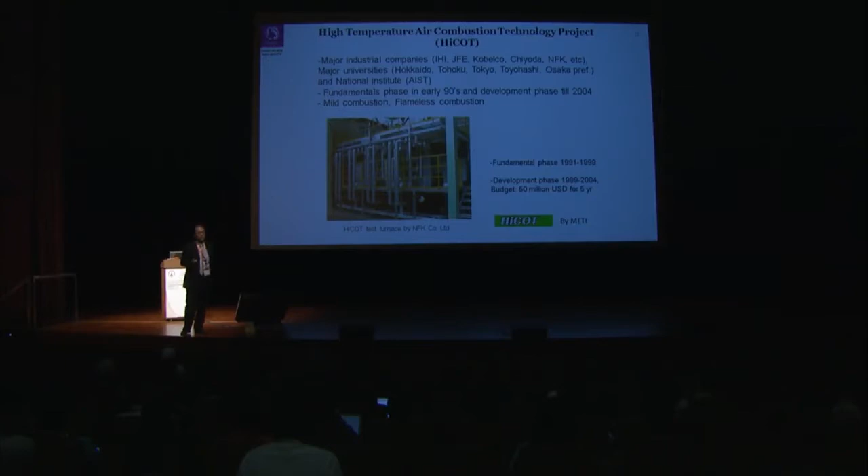This is one big project which started in the early 90s and continued to 2003-4. We call it high temperature air combustion technology, because the air is preheated before combustion. Usually it's not good tactics, because if you increase the air temperature, the NOx would increase. But just by accident, a young engineer found something very interesting in 1980, and now it's all widespread. I believe it's from Japan, at least this experience.

And what is the HiCOT? This is the concept—this is the oxygen concentration in the fresh mixture, and this is the temperature of the fresh mixture. Usually combustion occurs below like 400, 500 degrees C. Any combustion devices, like gas turbines or engines, after compression.

And in a furnace, if you preheat up to like 1,000 degrees C, combustion is possible if you have an appropriate heat exchanger. But in this case, a large amount of NOx is produced, so it's useless. But once you mix the incoming chemical enthalpy—the fuel—with a lot of burned gas inside the furnace body, then you can avoid the very intense reaction zone, which is the source of the large NOx.

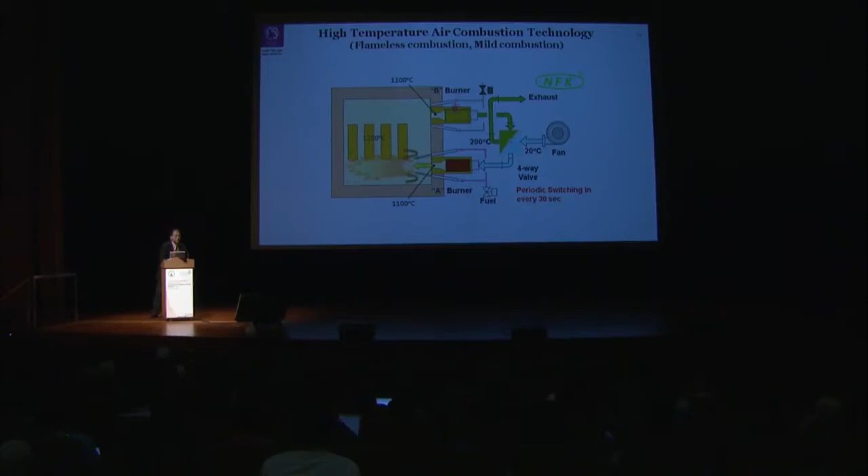After some repetition, the air temperature is very high, like 1,100 degrees C, because of the heat exchange here, and then only a 100 degrees C temperature increase by chemical reaction. And then this burned gas heats up this heat stage. Once this temperature is very high and higher, and this temperature low and lower, then you just switch the direction of flow, and then the same things happen.

Interesting is that after the heat exchange here, the flame temperature distribution inside is not uniform—it's a very strong function of the location. So before the exit temperature becomes higher, the direction should be switched. Then you can attain something like an exhaust temperature below 200 degrees C, which means all the chemical enthalpy coming into this system is effectively used to heat something, with no exhaust loss. This is exactly equivalent to the condition I just explained.

And at this stage, such a type of regenerator media is used. Interesting is that under the HiCOT mode, actually the flame disappears—of course, the flame is there, but if you look at that zone very carefully, or make laser measurements, some of the radicals and a blue reaction zone are observed, but not like common combustion.

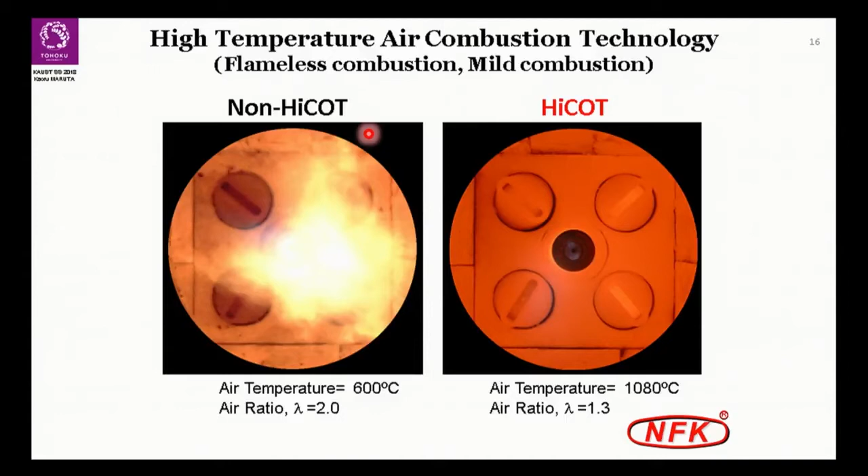Yes, twofold. One is that the fuel is injected at very high speed, which makes the turbulent mixing very fast. So it's not a premixed system, but rather because of the very fast mixing, it's like an ignition-controlled field. Up to the findings of this mode of combustion, there's no fundamental work, because it's not a premix system, it's not a non-premix system, but it's really similar to combustion in porous media.

And then in this mode, actually the highest temperature is far below what's needed for NOx generation. So it is used and widely applied to various things.

Let me go back to this initial figure. Here, there's one curve here. The author of this figure was thinking about the premix system, so he thought it was impossible to mix the premixture without reaction up to such high temperature. But don't worry about that, because you can use a very high-speed jet like this condition.

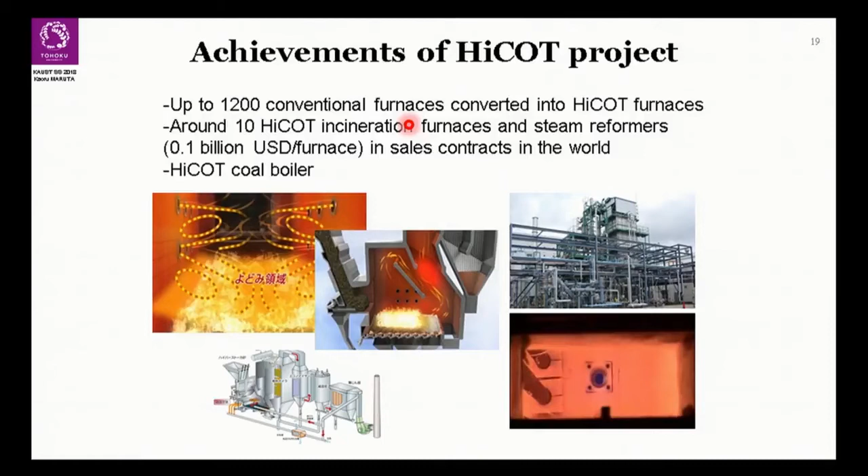No NOx, almost nothing. And the combustion noise disappeared because there's no flamelet - very silent combustion. And also the temperature is much closer to uniform because there's no flame. This means you can have a very small furnace body, which means you can decrease the size of the furnace.

And what is the source of loss for a very large furnace? It's always just from the surface, loss from the surface. If you decrease the size of the furnace, proportional to the surface area, the loss can be decreased. This effect is very drastic, so then you can have very high thermal efficiency.

Oh, it's already 15 minutes.

Okay, so far, then microcombustion - maybe I need to skip most of it. So far, what have we learned? Flame limit is controlled by a certain heat loss. So flammability limit and quenching diameter are not properties of the flame.

It's just a condition-driven event. This means you can control the flammability limit. If you introduce some heat generation, heat recirculation, mass recirculation, then you can change the condition of combustion. Which means if you have a small system but with something like excess enthalpy combustion, you can have small-scale combustion, right? Size doesn't matter.

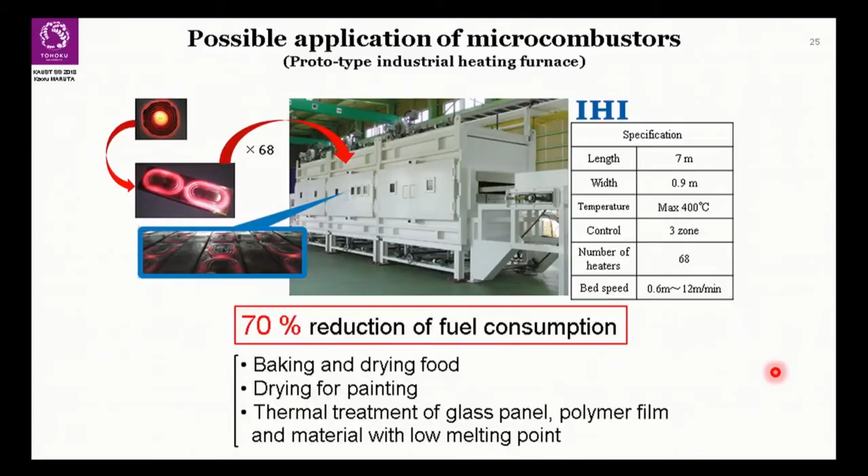It's really a simple principle, because if you use combustion for cooking or heating something, it's unavoidable to have very high temperature burned gas. But in this case, the exhaust temperature is very low, and the given chemical enthalpy is all effectively used to heat something. That's the reason such drastic fuel consumption decrease is attained.

10 minutes, okay. During the development of such a heater, we observed a very strange phenomenon. We visualized the inside of this Swiss roll burner and found something very funny, a flame like this. Let me explain what this is.

This is what we call a microflow reactor with a controlled temperature profile, which is just a quartz tube, heated from outside. The original motivation was to try to resemble the condition inside the Swiss roll geometry, because it was hard to stabilize a flame, since due to the heat of combustion, the body itself is heated, and the temperature at the center is higher than the peripheral part, of course.

So the incoming mixture experiences increasing temperature as it channels up to the center. That's why it is very hard to stabilize a flame, because the flame is trying to flash back into the entrance.

So to resemble this, an external heater, whatever, electric heater or burner, was used, and the diameter should be small, because attaining a very small Nusselt number means the temperature of the flame is not fully controlled by the chemical enthalpy of the flame, but rather by the given temperature distribution used to simulate it.

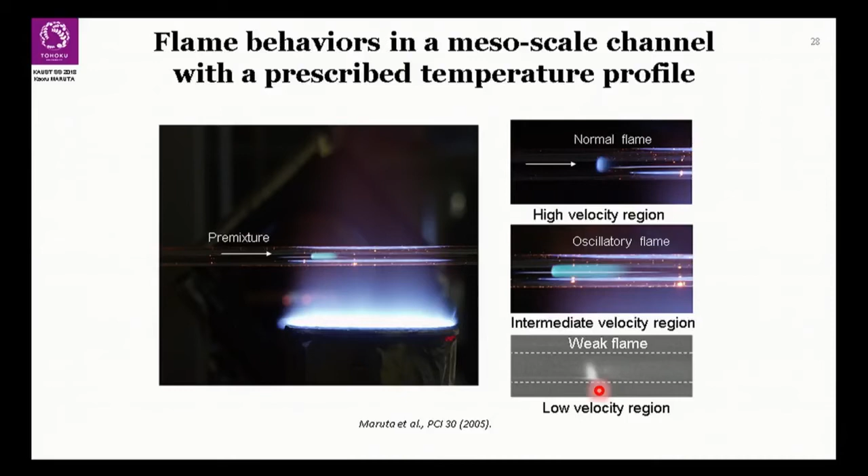In addition to that, at very low flow conditions, low velocity conditions, we have another very stable flame, which has a very, very low burning velocity, if I can call it that. This flame is observed when the mixture velocity at the inlet is less than 2 or 3 centimeters per second.

What is this? Okay, three flames, normal flame. The second flame here is actually where ignition occurs at the high temperature side. This is just auto-ignited, right? Of course, because the temperature is high enough, so it auto-ignites. So the flame kernel or ignition kernel runs to the upstream, to here.

And then, of course, the temperature is low there because of large heat loss. This ignition fails and extinguishes. But again, fresh mixture is coming in. The next mixture is just ignited at the downstream, right? It's common, but here it's just a stable flame. Why? Because there's a point where the local flow rate and the flame burning at preheated premixture are balanced.

But why? Here, because of the Spalding theory, after a certain heat loss, that stable solution disappears. So the flame doesn't extinguish because it's heated from outside, so ignition and extinction repeat.

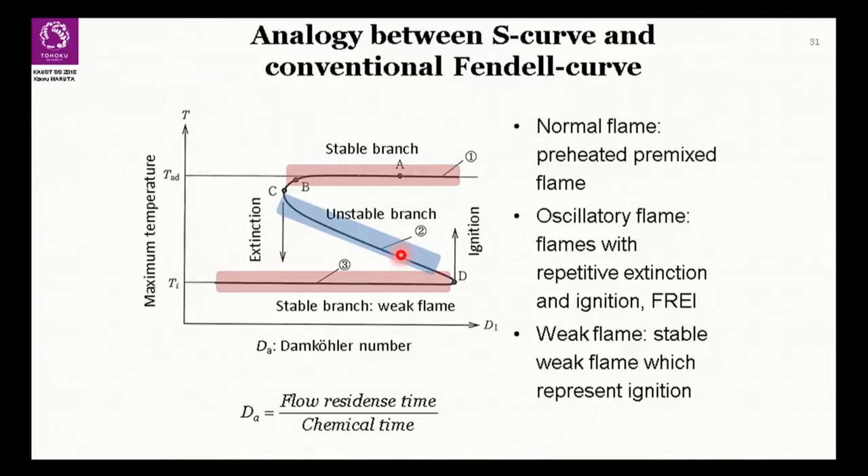So in this branch, at slightly elevated temperature, the solution branch appeared. That's the flame we observed there. What's the property of that flame? We measured the temperature, actually the difference between the flame temperature and wall temperature. This value is typically 20, but with decrease of flow speed, it asymptotes to 0, but at a certain point it disappeared.

Here the temperature difference at the reaction zone with wall temperature is 2 or 3 K, but below that the flame disappeared. Why? Because of diffusion loss of the radicals, since the flow speed there is very low, almost equivalent to the diffusion velocity. So the incoming enthalpy and the lost enthalpy by diffusion compete, and finally diffusion loss wins, and the flame is extinguished. This is what we call weak flame.

Okay. Five minutes, yeah?

What is a weak flame? A flame with, if I can say, burning velocity like 0.5 centimeters per second or 1 centimeter per second. Temperature just above wall temperature, or 2 or 3 K at the extreme case. But a very small amount of chemical enthalpy is formed. Yet this flame is sitting on the branch of ignition.

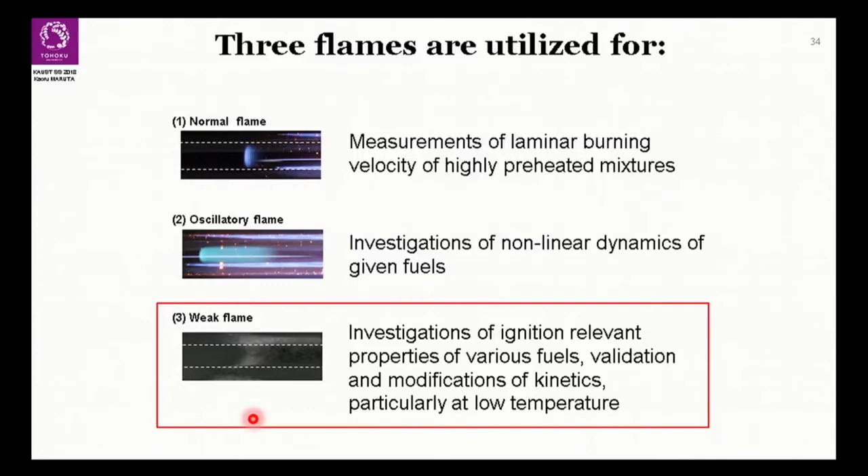So we have 3 reaction zones together for the weak flame condition. Let me skip - very simple computation with the heat transfer term between wall and gas phase. Three flames, three heat generation zones.

By comparing the computation with sampling experiments, we found that the first very weak reaction is low temperature oxidation, producing H2O2 and CH2O. Then here it's an intermediate reaction, sometimes called blue flame, sometimes called partial oxidation, because the reaction proceeds up to CO but is not fully oxidized. And the third point is fully oxidized - CO is all consumed and we have all CO2. This means that for this weak flame, with fuels having low temperature chemistry, we have 3 reaction zones at one time.

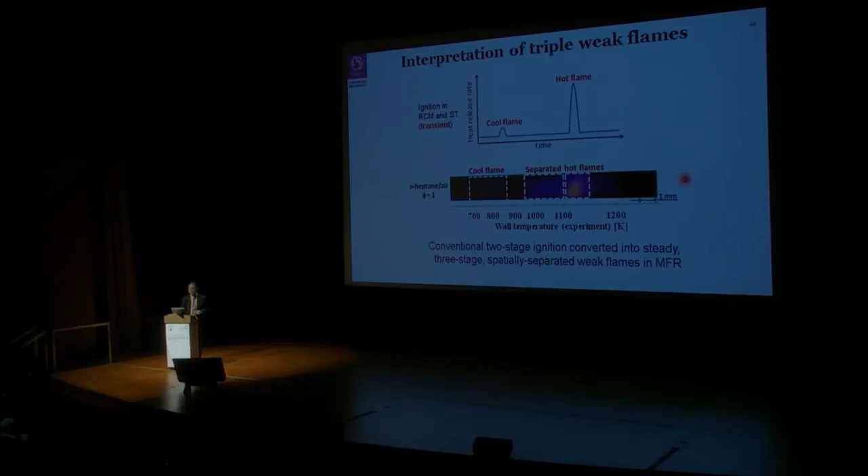So these are the 3 weak flames here. But look at, for example, shock tube or RCM - you have a 2-stage reaction, LTO and HTO. But in the reactor case, because only a very small amount of chemical enthalpy comes in, the flame cannot make a full thermal runaway, partly because of the small chemical enthalpy, and also because of temperature restriction by the external temperature distribution and the very small diameter. Usually the two reactions combine into one reaction zone because one thermal runaway occurs. But here we can have separate reaction zones - blue flame and main flame - so this cool blue main flame structure.

So we can utilize this to check the difference in fuel properties, such as octane number. If we use PRF, a mixture of normal heptane plus isooctane, and change the ratio - which is the definition of octane number - we see that the N-heptane mixture has 3 reaction zones, but with increasing octane number, as isooctane fraction increases up to 100% isooctane, the low temperature flame disappears, and also the location of the blue flame and higher temperature zone shifts slightly to the higher temperature side, which reflects the fuel property.

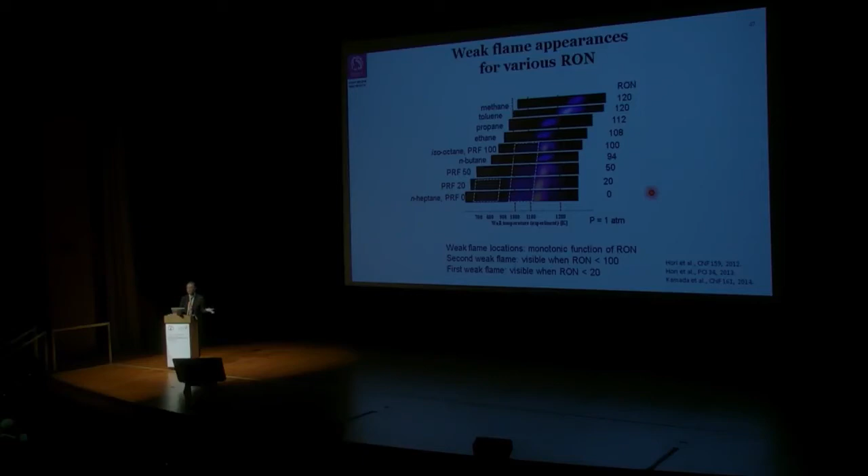It's practically the same result using the vertical type reactor, trying to increase. This is the one where we try to push out the second and third flame because we want to measure the concentration of species in only the cool flame. So the highest temperature is limited to about 700 K, and only the cool flame is attained here.

Based on the sensitivity analysis, among the several paths of the LTO, we found that 2 paths are dominant in these conditions. One is the radical branching path, which leads to the aldehyde, and the other is the radical propagation path, which passes through the cyclic ether to lead to alkenes.

So then we decided to measure those species. We employed the Livermore mechanism for heptane, KUCRS made in Japan, and also model fuel library. None of them can predict the species distribution.

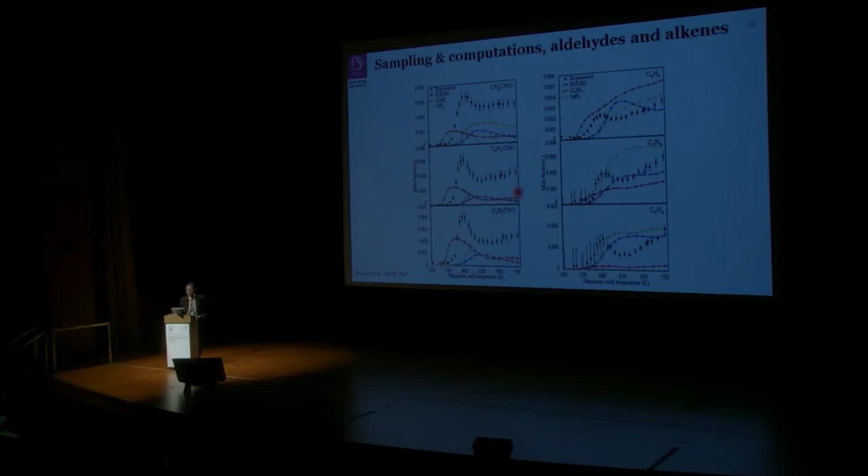At this stage, we don't know the reliability of the experimental data, but we tried and repeated. This is the aldehydes and alkenes, also showing different behaviors. Finally, looking at the branching ratio between the radical propagation and branching reactions, no chemistry can predict it at all.

We worked on different things. Since there is no limit, we can use this for validation of very lean mixtures, like equivalence ratio 0.3 or something, so we can test the reliability of chemistry in such conditions. Also, some laser diagnostics were made to check the methane reaction at very, very low temperature. I don't know if it's important or not.

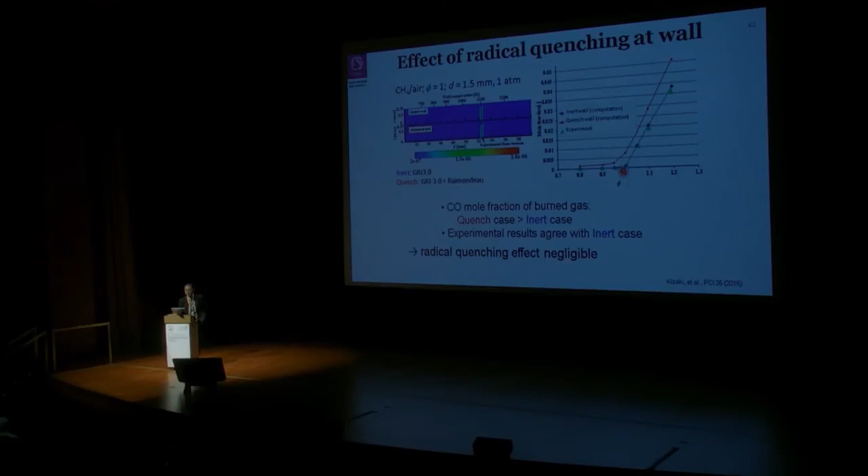This was confirmed by experiments combined with 2D computation, focusing on the measurement of exit CO concentration as well. This is also work by the group from University of Tokyo, using the same principle: give a very precise temperature distribution, make the laser measurement, and then put the surface of quartz, stainless steel and quartz itself, and aluminum with a very thin layer at 120 nanometers, which doesn't change any thermal property.

And then check the radical concentration very close to the wall. What they found was that the sticking coefficient is different. Existing chemistry suggests a sticking coefficient of 1, meaning a very, very large chemical wall effect, but in fact aluminum can be 3 orders different, quartz 2 orders different, and stainless steel has some effect. This means the chemical wall effect is very small, and it can be neglected in the conditions we have been working on.

This reactor is now commercialized as a test device for fuel, and so far 2 devices have been delivered to automobile companies in Japan. My dream is here: we have a small reactor, and we check the fuel property before combustion in the engine. This is for the fuel flexible vehicle, because now is the era of fuel diversity, so you can use any fuel, but something like octane number property is very, very important to preserve the engine and also to attain the highest efficiency.